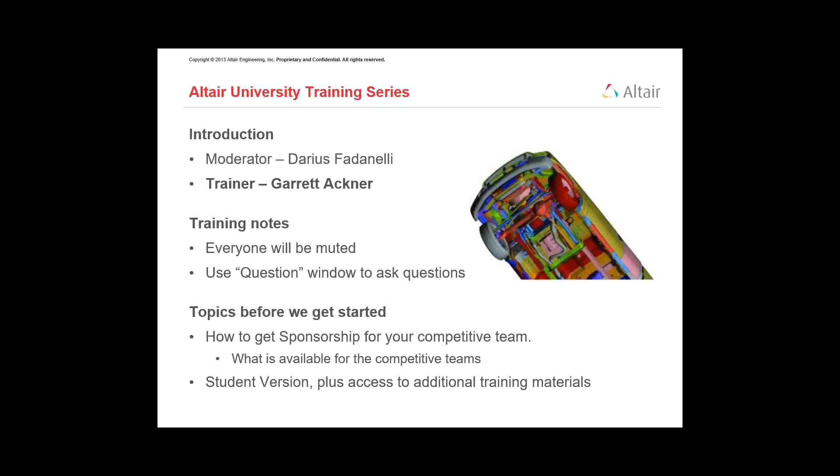Yep, that is correct. So thank you everyone for finding some time this afternoon to be here. As Darius mentioned, my name is Garrett Ackner. I wear a few hats within Altair here. As Darius said, I currently work with our training schedule and our training team.

So really why that matters for you guys is I've probably taught this course dozens of times. I've lost count, frankly, at this point, with both students such as yourselves, folks that have been doing this longer than I have been alive, and kind of everywhere else in between. So certainly happy to pull through a few different past classes and experiences that I've had to help you guys out learning the tool throughout the next couple days together.

Now, one of the things I like to do while I'm going through this, let's see if I can pull this over correctly. I'm going to be a big fan of little note sheets while we're going through this. So to help balance the different materials we'll have, we're going to use a combination of lecture slides, demo models, as well as a few of these hand-typed notes.

I'm going to do my best to both save and share these with you guys at the end of the week. So anything we talk about or write down on one of these little text files together, this is a sample note sheet. I'll make sure I'm sharing and making these available to you guys.

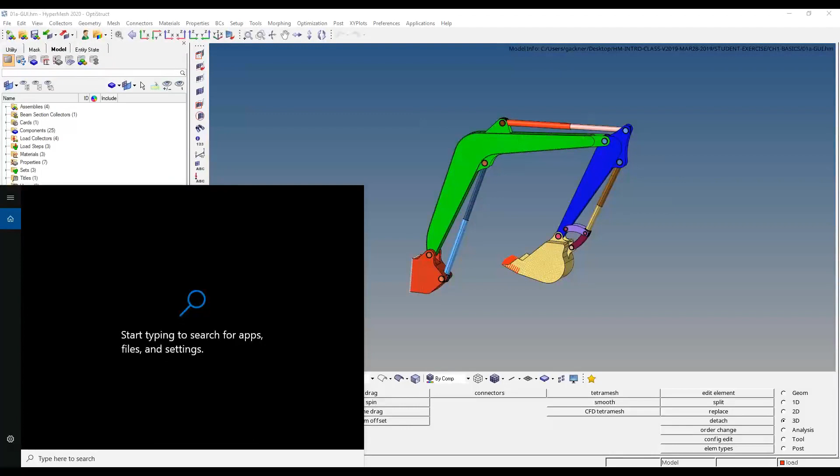Once you're able to get everything installed, and hopefully people have the packages installed on your machine, for those of us using Windows, you can always search on the bottom left Windows toolbar for HyperMesh software. For me, typing HyperMesh in pulls up my own list of all the different builds I've acquired over the last few months for different customer purposes. I wanted to let you guys know I'm using the latest HyperMesh 2020 software. It's okay if you have access to 19 or 2020 - there haven't been too many breaking developments between the releases for this particular product, but just for disclosure, I wanted to let people know which product I'm using.

Now, once you get HyperMesh launched, how do we actually bring in my crane model? What the heck did I just do with it there? HyperMesh, I'll be the first to admit, is a busy interface.

There's a couple things going on here. My goal for today is for us to be familiar with the interface and know how to navigate around the product and within the models we're working with. In a little bit, once we get the ball rolling, we're going to take a look at some basic geometry editing tools, working with solids, working with different surfaces to split those up. And we're going to end today with some basics of surface meshing.

Now, it's okay if all those are new terminology. We're going to start slow here. Moving into tomorrow, we're going to spend quite a bit of time using the product's namesake with a lot of the meshing tools available to us and really go from there. So just to reiterate one last time here.

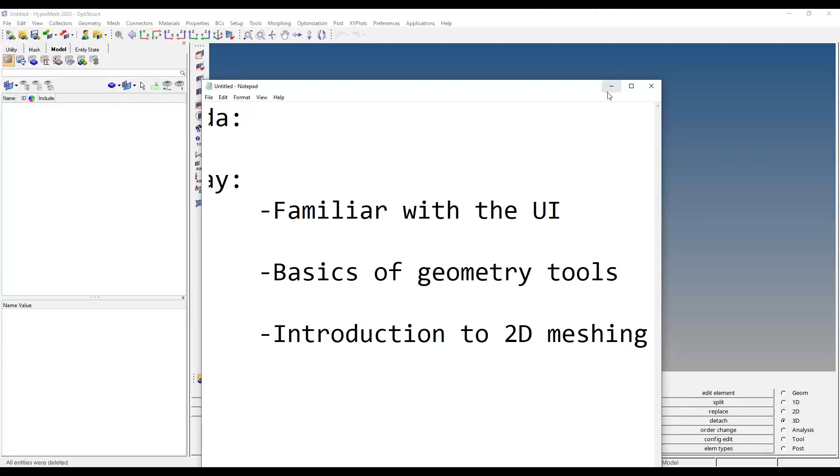Agenda for today, Monday - I want to make sure we weave in the following skills: we should be familiar with the user interface, basics of managing our geometry, whether it's simplifying things, making some basic edits, making some basic splits or cuts, and intro to 2D meshing. We'll cover what these terms are and why we need to do those things once the time is ready.

Now, the absolute most basic thing of HyperMesh, step one here. So now that we've found in our Windows machine where we can launch those, I like to do the search, and within your different applications there should be a little Altair folder. I have an Altair 2019 folder as well as an Altair 2020 folder for my unique packages. I believe for the student edition, that should be saved the same way. Under one of those lists, you'll find your HyperMesh product.

Once it's open, typically what I would start with is getting familiar with our pull-down menus. There's some expected things here, hopefully things we've seen before. If I go to my File pull-down menu from the main toolbar at the top, I have some basic operations - File New, File Open Model, Save or Save As, and import and export options are all available within this pull-down menu. There are plenty of different ways to save things, bring things in, or kick things out of the software. Likewise, there is a basic Edit and View menu as well. So our first mini lesson is we're going to go to our View pull-down menu. For anyone here who's got HyperMesh launched already, you're welcome to follow along with me.

For those of you that would rather just watch and try later, that's all right with me too.

I'd recommend coming into the view pull down menu at the top left of the software. Make sure the model browser is checked on, and also make sure the utility menu and the entity state browser are turned on. Just a few things we'll want access to while going through things together this week.

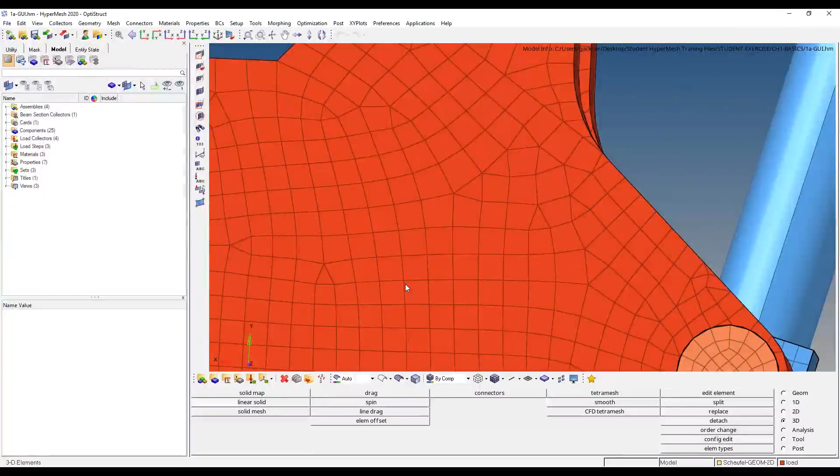We see things that almost have checkered lines on them, broken up into different shapes. I can see the mesh of this red claw body, with all those different individual mesh lines breaking up the different elements or shapes it's grown up with. We'll talk about those in a moment. We also have some smoother cylindrical bodies - we'll talk about what's going on with the actual shafts of that connection rod built in there.

If we come over to the model browser on the left side of the screen, let me bring up a spotlight tool to help with this. Towards the top left, I'm turned to this page called the model browser, which is my list of anything and everything added into my HyperMesh model. For this existing crane model, I can see in the model browser that we have a couple of assemblies defined.

We have something called a beam section collector. Coming down a bit, I have 25 components. I have load collectors, which are organized into load steps. And we even have things like material and property definitions built into this model.

As you'd expect, I can take my mouse and with a left click open up each of these different folders within the model browser. As an example, I can open up my component tree and review individually the 25 components that make up this assembly. We're not going to go through these one by one, but I can see I have something called a cylinder's geometry, a pin 2 geometry, the shovel itself, and they have a couple different things associated with them - that's what I want to talk about first, what's in our component browser.

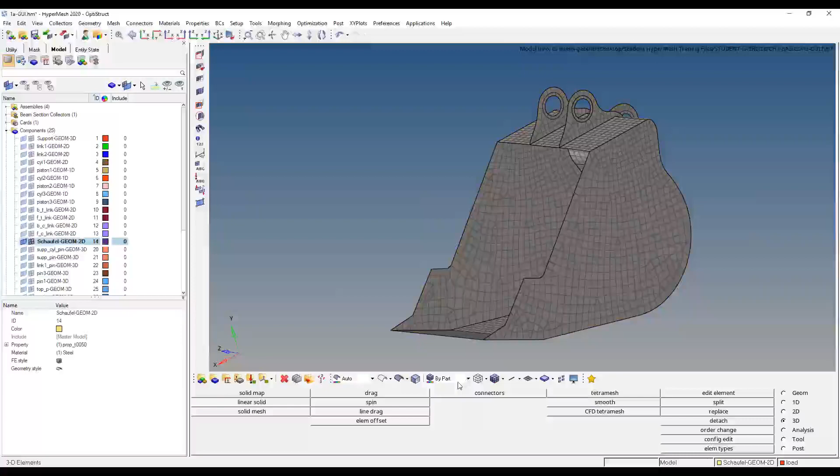I didn't want to update for very specific reasons there. Oh, that's fine, there we go. Now it wants to change colors — I was about to lose it there. We're good now. But just wanted to show that with the components, you control the ID numbers assigned to them, and we can also control the colors for them as well.

Now, what I want to talk about here for a moment, as Darius was starting to get us into, is what's going on with those flags that I mentioned next to each component name.

So they have an ID—sounds great, never going to change it. We have colors; I'm going to make everything my university's color scheme. But what the heck's going on with these two different flag settings?

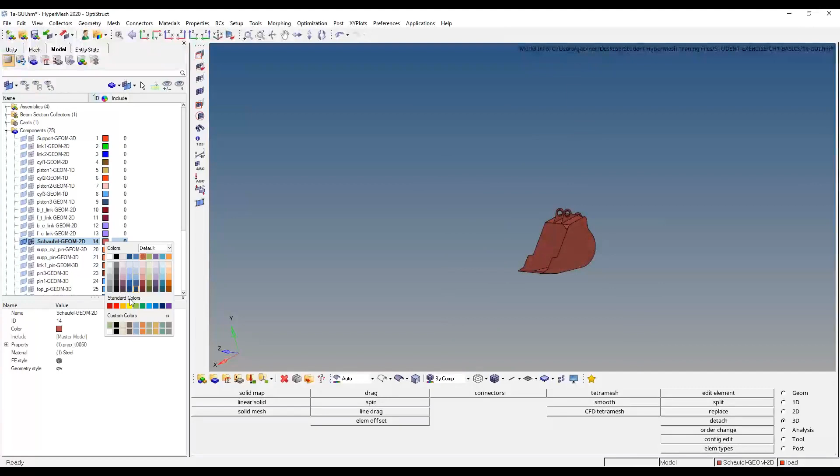Well, this is really getting into the idea of why we need finite element analysis in the first place. So what I'm going to do for a moment here is turn everything off my model and start with just that shovel component again, and I'm going to bring it back to that yellowish color to make it a little easier to see.

Now, typically in finite element analysis, a generic workflow would be to design your part in a CATIA or SolidWorks or some more traditional CAD package—something with a lot of drawing and surface tools to get us not just sketches, but the full 3D model that we can spin. That's what we're going to typically refer to in the FE world, and for the sake of my class, we're going to refer to what's coming out of SolidWorks or a similar package as just the geometry—the geometry file we're working with, whether it's a CAT part file, a solid part file, or whatever else you can get out of these tools.

And if I zoom out for a moment, what I have on the screen is just the CAD file that's been imported into HyperMesh. Now, what we're responsible for on the simulation side of things, and where finite element analysis is going to be introduced, is we are going to discretize these geometries into a different type of geometry that we're going to refer to as a mesh—not only something a computer can read and solve math problems on that's been defined in the software, but that's really where we're getting at with this. This is the idea that we're going to take this geometry file and discretize it. We'll talk about why in a moment.

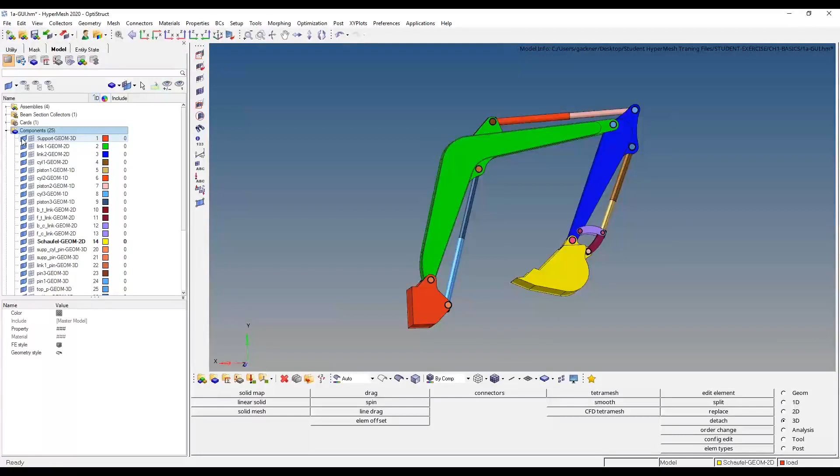So coming back to our flags, we do have a single flag that represents the geometry, or the original CAD, for that part. Right now I only have those left flags turned on in the model browser—I apologize for them being a little small, but the video sharing and I don't get along; you can try to change the application size. Then the other half is that mesh that we're going to generate. So you can almost think of the left flag, the geometry flag, as the starting input that my designer gave me, and now what I'm going to be building are the checkered flags, or the meshes themselves.

And now if I zoom into these, we're not just seeing a perfectly smooth surface across my digger claw—I'm starting to see these various squares and triangles that were created on the surface. This is actually what we're using to represent a part now. It's going to be these squares and triangles, or tomorrow we'll see we can use cubes and wedges and pyramids as well to represent parts, and that's what we refer to as a mesh. So those individual shapes, those tiny bits of the surface or tiny bits of the part, those are the mesh that we generate.

That's why the company charges the big bucks to have access to the software, because that's the real star of the show. And that's kind of what I want to talk into here for a few minutes by putting the software away for a moment. Now, there's a few questions I'm going to come and get to in a moment here.

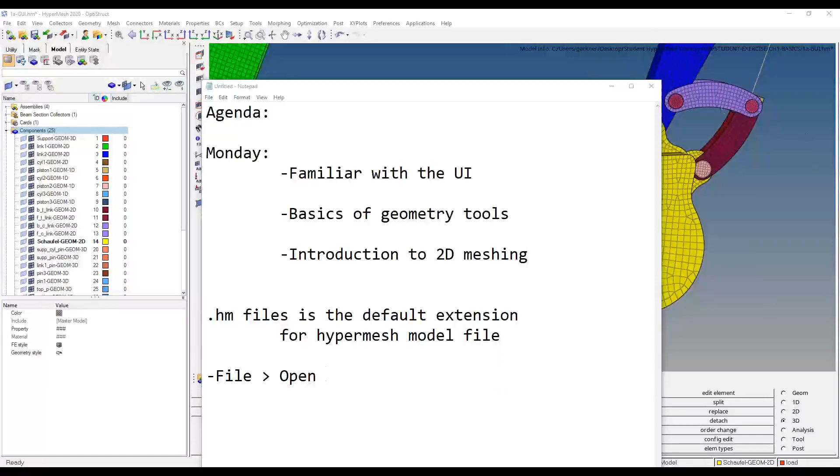I see those coming in. I want to do a quick little background on the theory lesson here, make sure we all got our feet on the ground and we're on the same page moving forward, and then I'm going to come back and address those with Darius here in a moment. Yeah, Garrett, all the main questions have been taken care of, except someone's having trouble from maybe one of the files. But perfect, thank you, Darius.

So what I want to talk to us about today here is what's going on with finite element analysis—what actually is finite element analysis, and why do we need HyperMesh for it, and what's the benefit of this?

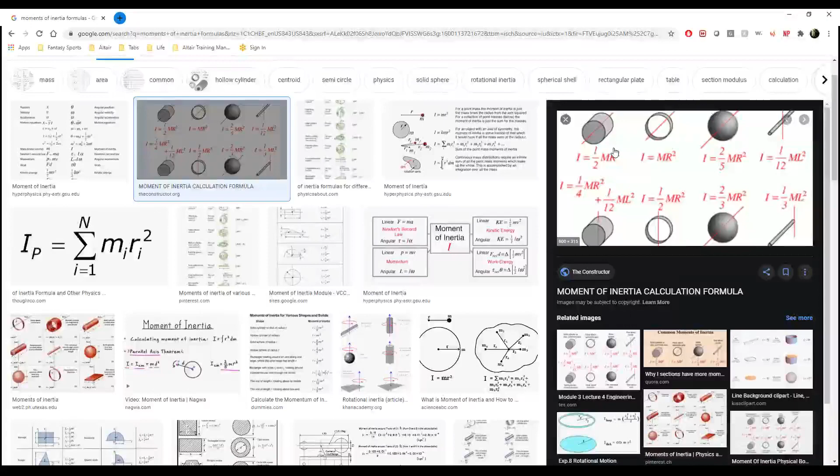So what do we do about our control arm here? We're going to play a quick game of Pictionary together. This is where you guys get to laugh at my drawing skills. So just consider any arbitrary block—this ain't a control arm, this is something else. And my mouse got away from me, so now I got to restart here.

This is going on an auto part, but we have no idea how to describe this in math terms. For now, let's go back to moment of inertia—that's the only thing we need to describe about this geometry in math terms.

Rather than integrating it into infinitely small slices—that's what we do when we're integrating, we're treating things at an infinitely small level—we're going to do it at a finitely small level. Hence the name finite element analysis.

So I think we might agree the math could be hard to solve on something like this—the von Mises stresses that could form from a 150 Newton load being applied directly on top of it. I think we could all agree that if this was a perfect square or a cube, that's a relatively trivial problem to solve. So how do we do that?

Well, rather than breaking this into infinitely thin slices, what we're going to do as users is come in here and break this thing up into squares and triangles—not infinitely small, they'll be kind of small, but not that small.

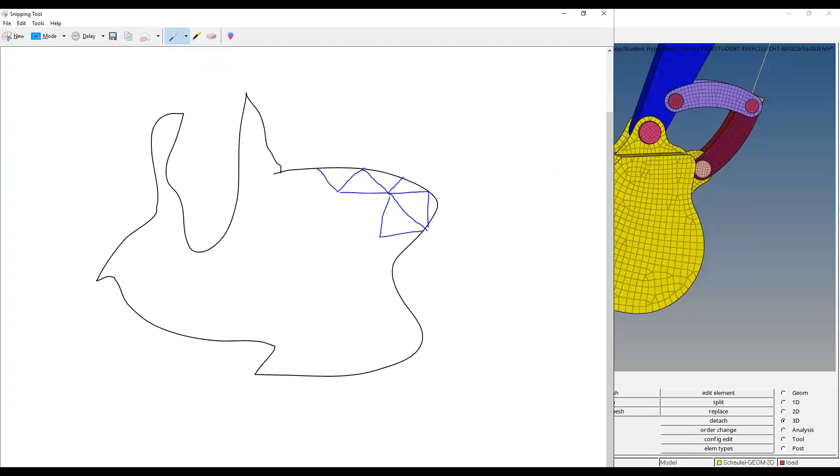So what's happening is the idea behind FEA is to go from one complex geometry, which yields one complex equation in my mind—that's kind of how I think of that. Your CAD file on its own is a complex part, which is going to have all sorts of really complex equations to describe it mathematically. We don't want to deal with that because we want to solve our problems cheaply.

So instead of one complex geometry, one complex equation, we're going to discretize it, or split it up, into many simple geometries with tens of thousands, even hundreds of thousands of elements, depending on the size of the model and what we want to do with it. As a rule of thumb, the more of these elements we use in our meshes, the longer the problem is going to have to solve. We'll see why that's the case in a moment.

But the reason we want to go to these simple shapes is because we know how to quickly solve math. We have convenient formulas for a perfect square, an equilateral triangle, and all these different things. It turns out computers are a great application for solving thousands of simple linear equations in parallel versus one extremely complex equation. It can do the linear equations much faster, even though there's thousands more. So finite element analysis is a really good application for what the computer has turned into.

It's an industry-proven and historically accurate way to do many different problems, including statics and dynamics and all sorts of structural and automotive parts. But I want to talk real quick here on why we ultimately need to go to simple equations and what those equations are. Hopefully this is starting to make a little sense here.

So again, we want to go to simple equations because computers can solve those more quickly, even if there's thousands of them, than the complex equation. But what's the equation we need to solve? What's FEA actually doing? There's going to be different answers to this, whether you're doing a normal modes analysis for the dynamic behavior of a part, or if you want to just do a pure linear static to see how a force will cause a part to deflect.

Those might be slightly different things, but in general, what's going on in finite element analysis is something we've all seen before. It's essentially Hooke's law for an ideal spring, extrapolated into a couple different dimensions. So it won't be just a simple 1D spring - certainly you'll have to account for it in 3 dimensions, but that's the same idea here. We're going to do a quick mini lesson on Hooke's law to tie all this together. For those who don't know, Hooke's law defines the idea that any force you apply to compress a spring, the deflection or the amount that spring's going to compress is going to be directly proportional to the force applied to compress the spring, assuming a linear stiffness K.

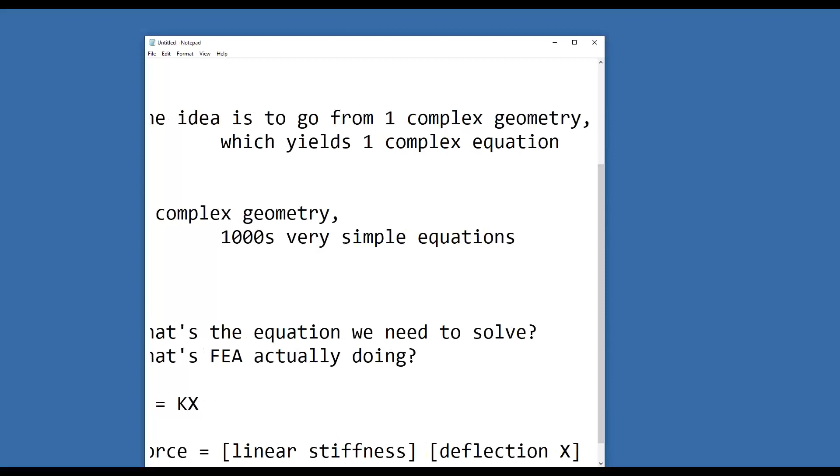So we got some force terms, a linear stiffness, and deflection itself there. Very straightforward. Now it turns out FEA is just solving this equation, but sort of backwards. It actually has to invert it. And that's why I want us to think of this here for the rest of the week.

FEA, a user defines this force matrix or vector, because it's doing this not just for one element, but all of those squares and triangles we saw on my crane model. It's actually solving Hooke's law for every single one of those and then moving on to the next one. So what are the parameters of Hooke's law? Well, we have the force, and that's actually a user-defined parameter.

You as users, and we're going to do this together a little bit more tomorrow than today, we're going to be defining pressures, loads, constraints. All of those different things are things we're responsible for defining. Likewise, you actually defined the stiffness matrix without realizing it. You don't necessarily go into every component and say this shovel on this giant piece of machining equipment is exactly this many Newton meters stiff. There's ways you can go about that, but stiffness is actually derived from a material definition and a property definition. Those are things we're going to go into more detail with tomorrow.

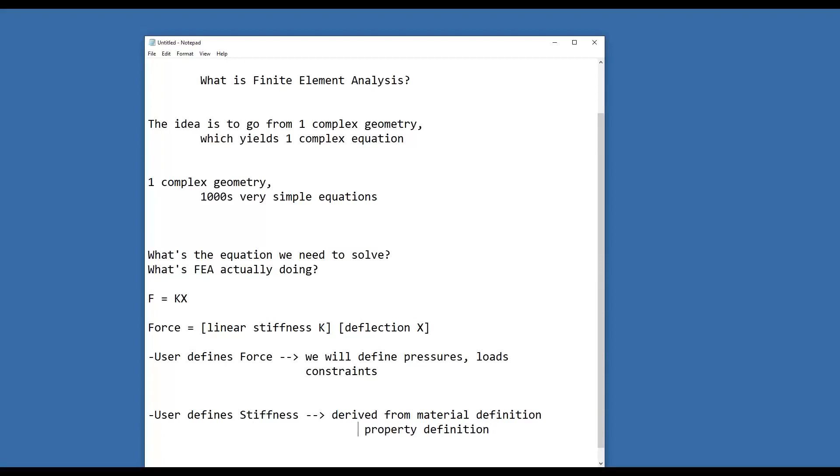And then lastly, so we have two terms. We have one equation, one unknown. It really just inverts Hooke's law to be F over K equals X. This is a deflection of the spring or element. This gets turned into a displacement and a stress result. So that's all that's going on.

What we're doing in FEA is we're taking apart a drawing file, a CAD part that we drew up in SolidWorks. We worked really hard on it, did all the extrusions and Boolean maneuvers. Looks really clean. It turns out that's a really hard problem to solve on its own. CAD files have crazy different geometry file formats—there's all sorts of ways you can define the same 10 surfaces. So rather than go into the world of really complex surface equations to solve Hooke's law in, FEA admits that could be a mathematically challenging exercise with a lot of inconsistent results.

So we're going to just break things up into many small shapes. Turns out small shapes have easy math to work with, and we're going to solve complex math problems as a series of very simple equations. Through that workflow, we can determine yield stresses on all sorts of auto components, do dynamic analyses, work with moving parts. There's a world of physics problems we can simulate in finite element analysis.

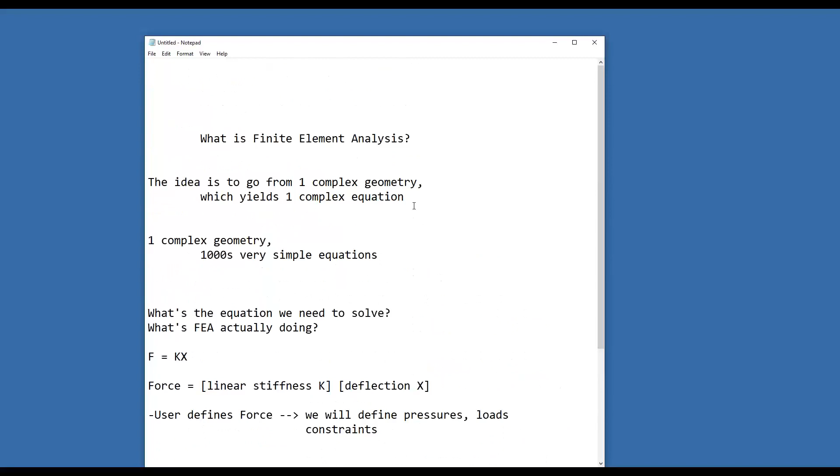I just want to make sure we understood, before we get too far into meshing today, why we need to do this. And the biggest reason is that it's a mathematically expensive problem to solve. But if you just break it into simple equations, simple shapes, it gets a lot easier. And if anyone ever asks you what's going on in FEA...

You are not wrong if you just tell them it's Hooke's law. Someone might laugh at you and say that's not a complete answer—I would tell them to go shove it. You're welcome to do what you want to do, but really, it doesn't need to be any more complicated than that. And that's where we're at with this.

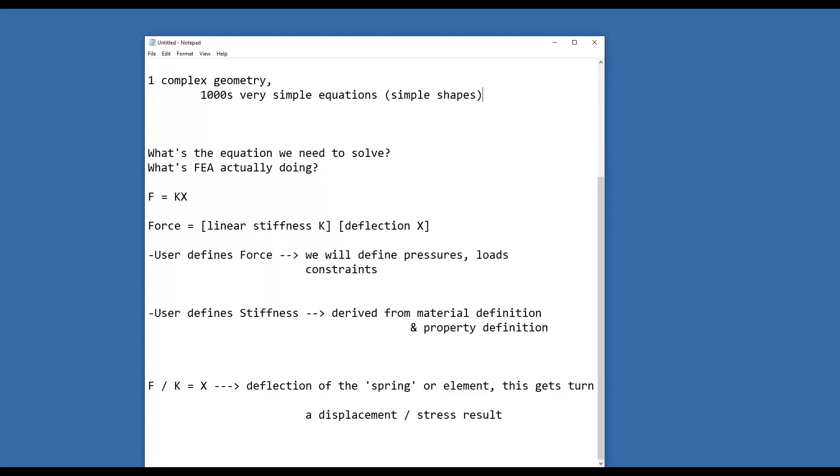So hopefully that gives us some traction here for those of us that maybe have had some other experience with this that helps fit your own narrative, how you thought of it. We're kind of going to continue, but I'm happy to pick up with people as we need to throughout the week here.

Now, with that said, I want to talk a little bit about some steps we'd want to take with our geometry files as well. And actually, before I get there, I want to make sure we wrap up with our model browser. I don't want to go too far here.

So what I'm going to do here is come back to my little crane model, and go back to that component browser in my model browser. So I have my component tree open, and again we're seeing all of those different components again. So what's going on here is we have those two flags we were learning about.

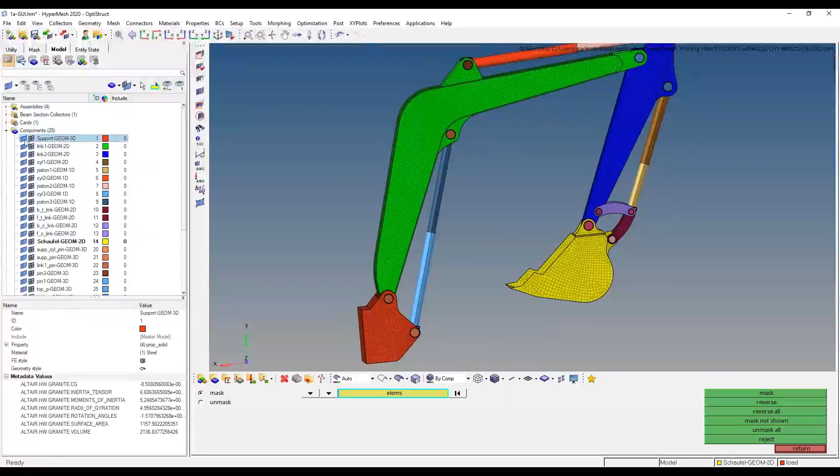And we're going to remember that the flag all the way on the left—I turn everything off—will allow me to review the geometry of each part. That's the CAD entity of it, and the input that our CAD designer sent us. And we're going to remember that the other flag, half of each component, is going to be the elements or the mesh that's associated with that part.

So it's nice that HyperMesh keeps those entities separate. We'll see why that's specifically the case, but I like to think of it as a good way to keep track of what you started with and what you're going to turn into the computer to solve your problem and get these optimized or simulation results completed. And some nice quality of life things we can do for driving a HyperMesh session.

As you've hopefully seen, as I left click with my mouse on one of those flags, you can turn that entity off. For example, I could come into any one of these components and start left clicking to turn off all of those flags, and it will hide the geometry half of the component. Notice the mesh is still being left behind - that has a separate flag to turn off.

Just like I'm turning off all of my surfaces or my CAD data, I can turn off with that same left click the meshes for these components by left clicking that mesh flag as well to toggle that off. So quick ways to turn on your CAD, turn off your elements, vice versa, whatever's easiest for you to see at the moment.

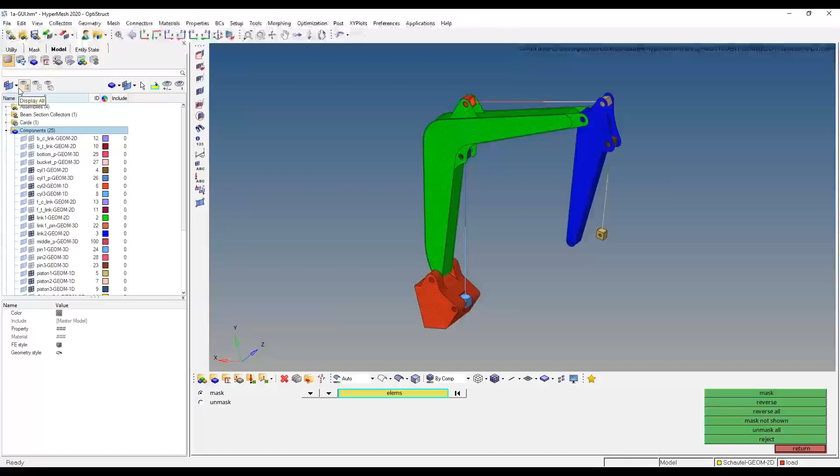The first thing on the left of this little toolbar, just above the model browser, is a drop-down flag control. For now, I'm going to leave this to be on both the mesh flag and the geometry flag. Just note we have controls here to display everything, to turn all of those flags on, a control to turn all of them off, and you can even flip the display state as well. So right from this little browser, you have quick controls on what to turn on and off, like we saw earlier - individually or in a more global way.

One other thing - I got to come a little more to the right to highlight it again. So I come up here, all the way to my right side, there's another one of those scary looking eyeballs. One of them's got a plus minus, one of them has a 1. These are two tools that are toggled controls. I'm going to left click it to turn it on - you'll see it's highlighted orange now.

The one with just a number 1 allows me to isolate a component - click to isolate it, nice and easy. Or likewise, the plus minus tool works in a cool way where I can right click a component to hide it, or I can left click over where that component was in the display, kind of like referencing a ghost almost. You can left click to turn it back on.

So short answer, a lot of your display controls on what you're seeing in the software is all managed from the model browser, specifically within this component tree. You can turn things off individually, or from the very top of that browser, there's a couple other controls to manipulate what's coming in and out of the display state.

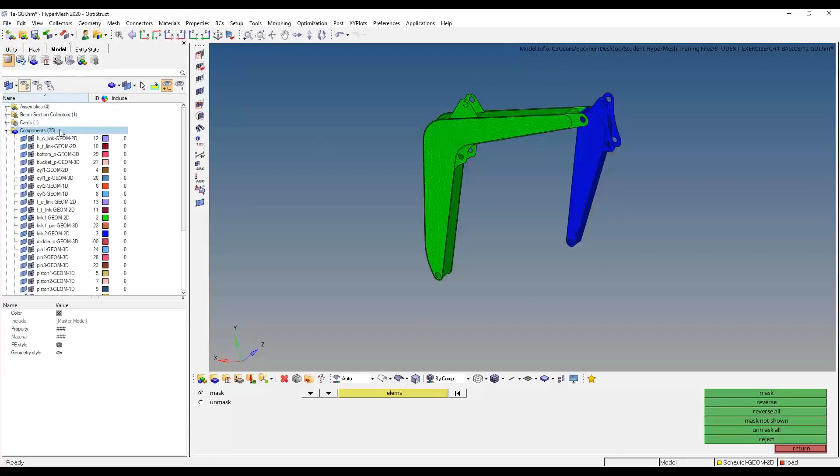I'm going to come back to this little assembly here and turn everything back on. And what I'm going to do next is go to File, Import, Model. I'm actually going to import in the next model we're going to see together. So I'm going to go to Import - it's already set to Model for me at the top left. Let me talk about what happened here.

It just opened up a little import tab for me. These 5 green arrows refer to some of the different entities we can import. I know that this first one is already set to import model, and if I hover my mouse over it, the tooltip will come up to let me know that that's import model. Now what I'm going to do is click the little manila folder just under it to select the file I want to import.

I'm actually going to go to our Chapter 2 student exercise folder and bring in a model called Quad Mid-Surface, and I'm going to import this in. Now you'll notice it didn't get rid of my crane assembly - it just dropped this new little surface model, this blue thing, right in the middle of space, and kind of had no regard for it. It just sort of showed up, didn't knock on the door, didn't take off its shoes, didn't do nothing, but caused me some problems here.

And that's okay - I don't want us to think that import is always bad.

One of the key features I hope we're taking away from this is that import is always, without any regard for you, appending to the model. It'll only add things without clearing.

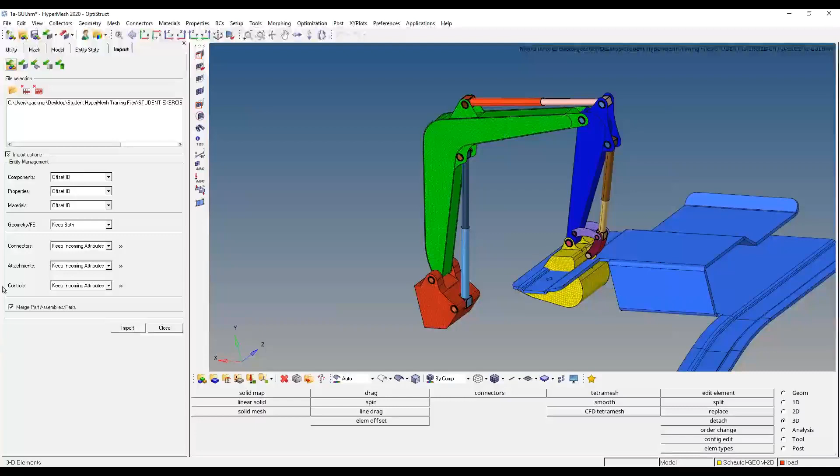Whereas if I come here now and do that same thing with File Open, I'll get that same model, Chapter 2C, Clip Mid-Surface. I'm going to open this. A little message is going to prompt me to discard the model. So I'll say yes, and now it launched a new session for me with only that new model in it. So rule of thumb: File Open clears everything before it brings it in. Import doesn't do any erasing.

Now, there's a lot of geometry tools available to us in HyperMesh, and there's a lot of reasons we could be interested in modifying or reviewing, or in some cases repairing geometry. From my experience, there is the biggest variety of different things you can do in HyperMesh at the geometry level, and it also has the potential to be the messiest. But I don't want to scare people, because while both of those can be true, 99% of the time you don't have to worry about your geometry. What I want to do instead is talk about what are some of the things I want to be aware of, what are some good habits for me to build while reviewing my model, what could that checklist look like. That's what I want us to think about while going through this.

So before we go too far, if we were to go into our student PDF folder here, I'm going to pull up Chapter 2 Geometry for a second. Now, this is a 111 page long slideshow for just Chapter 2. Likewise, the other sections are pretty large as well. And like I said before, we're not going to have all the time in the world to go through every single one of those slides. But I would certainly recommend to those of you with the time and those of you that are motivated to do so, give these PDF files a thumb through.

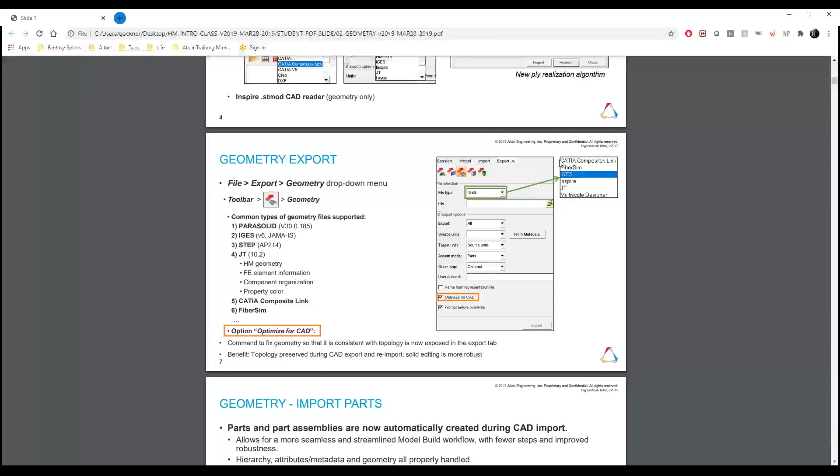If I find out you were reading one of these and it took you 8 hours to get through it, I'm going to find you and yell at you a little bit for reading it in too much detail. But what I would tell you guys is, take a half hour one day, while you're eating your Cheerios in the morning, or right before bed when you want to get a little bit of work done. Take a half hour and just thumb through these slides. There's a lot of good notes here, for example at the beginning on the different files we support and the commercial product for different geometries to bring in. It talks about the different geometry file types we support upon export. So just like there's an import, there is an export.

What I specifically wanted to show with the geometry slides is there's a lot of stuff in this slideshow. If I get down to slide 24 here on creating geometry in HyperMesh, we're going to see there's a lot of tools similar to CAD packages in HyperMesh to create new surfaces, new solids, just single lines. But in no way, shape, or form would I recommend that HyperMesh is your new start to part design and geometry design. We're going to see, hopefully by the end of the week, that FEA can do a lot of great things for our design processes. Specifically, creating geometry is probably not that one tool set.

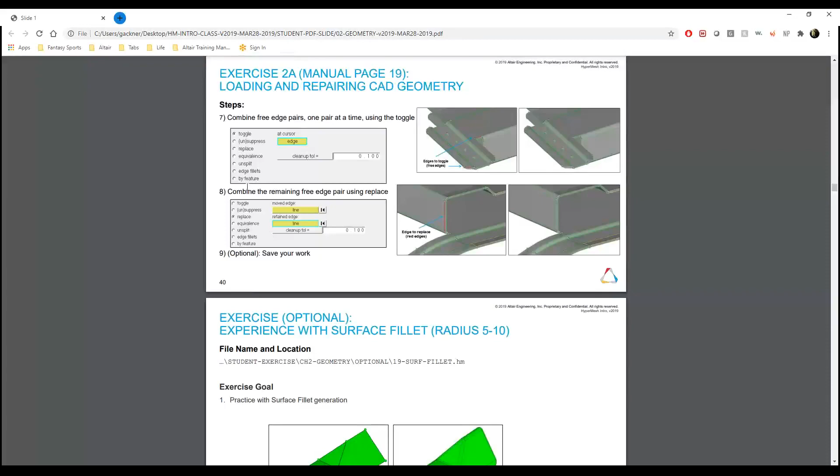So why I bring this up is if you're going through these slides and thinking to yourself, man, there's a lot of slides on creating surfaces and creating solids, don't worry too much on that. I would just kind of skip right through it. Or if you need some substitutes to your CAD package, definitely check out those features there. But I don't want to get too caught up in those. Instead, what I want to do is talk about some of the things that are probably worthwhile learning about as you're going through this.

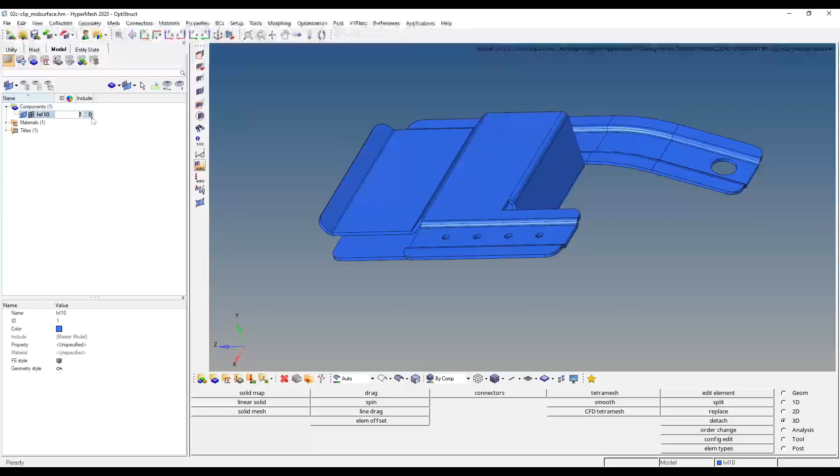Now, in FE or FEA, we've already learned that we're going to traditionally start with a CAD package or a CAD drawing file. In this case, I had a little simple clip model to work with. And this is a 3D part. I know that might seem obvious, but we're going to see today and certainly tomorrow that FEA is flexible in the dimensions of the components it works with.

It can work with both sheet metals or infinitely thin surfaces at a 2D level, as well as the 3D level here. But what we're going to learn now is that oftentimes it's a shortcut to treat 3D objects as a 2D object. And where we can really get away with making that sort of assumption, we'll see how it's not truly an assumption in a moment.

This is often done for sheet metal parts, a lot of plastic components, or really anything where it is much longer and wider than it is thick. So in this case, where X is roughly on the same scale as Y, but both of those are substantially larger than Z. And like we said, this is commonly in sheet metal, many plastics, especially injection molded plastic parts, we'll kind of treat as a 2D entity in FEA, even though it's a 3D object.

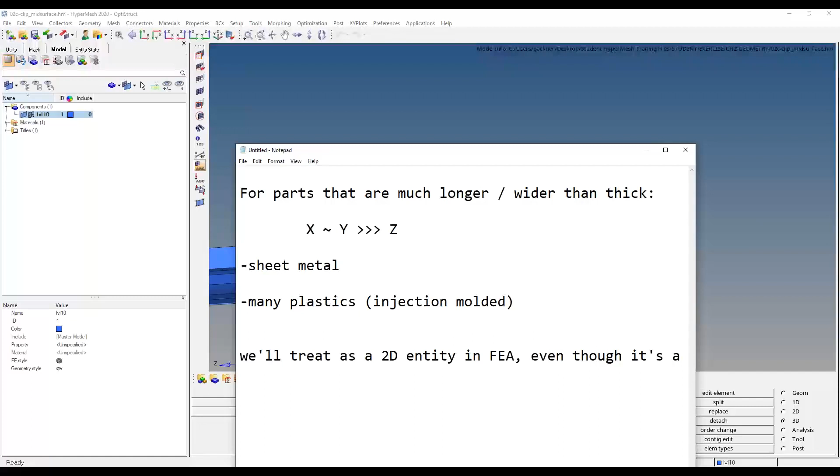So why the heck would we do that? What's the purpose of doing that? Well, I want to go back to our little short lesson in FEA for a moment. And then I promise I'm done doing the lecture. I probably should have forewarned you guys, the first hour with me is the hard part, and then I'm done talking at you. We're going to get really good at using the software here. But we're right there.

Knowing we got to do all this Hooke's Law stuff we talked about earlier, and we're doing it at each and every single shape or element that we created on the mesh, this is going to be dependent on the mesh here, knowing that we have Hooke's Law. So what are the implications of what we talked about on the previous slide? A couple obvious things here that I want to point out to us.

More elements means longer computation time because it has more equations. Smaller average elements typically means more elements. And likewise, for each element, Hooke's law is technically calculated. I don't know if I want to be that strict on it. I don't want to. At each node, though, and that's the final little entity we got to learn about here.

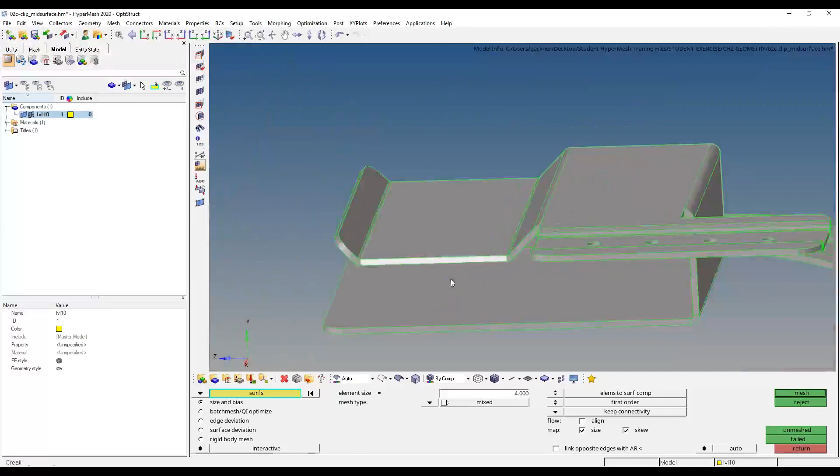So I'm going to come back to my little clip here, and I'm just going to throw a mesh on here. And again, I'll make this yellow to make it a little brighter for us to see. I'm going to come into my automesh tool. We're going to see how to do this together in our afternoon session in a moment. And I'm just going to put a little couple layers of square elements on this guy.

So I've gone ahead and started meshing this part. I've only applied elements to just one of the surfaces, and I'm going to zoom on that here. So each of these square elements, I know they're a little bit more rectangular, has four corners of it though, hence the definition of a square. But at those corners of an element, we refer to them as a node, and it's its own standalone entity. And those nodes have some relevance within the calculations as well here.

But where I was going with this, and why we need to be aware of the nodes, is we're going to play our last game of Pictionary together. And at that point, I promise you, cross my heart, all that good stuff, I will not bother you about theory again. But the last thing I have to talk to us about is when we can get away with modeling something as 3D as 2D.

So we're already kind of starting to think to ourselves that sheet metals and plastics and generally things that are thin, and the terminology you'll hear often are thin solids, is that we're going to model them not as 3D but 2D. And why we might want to do that is just to reduce solution time. This might seem trivially obvious, but it's still a very good shortcut and a very good thing to remember.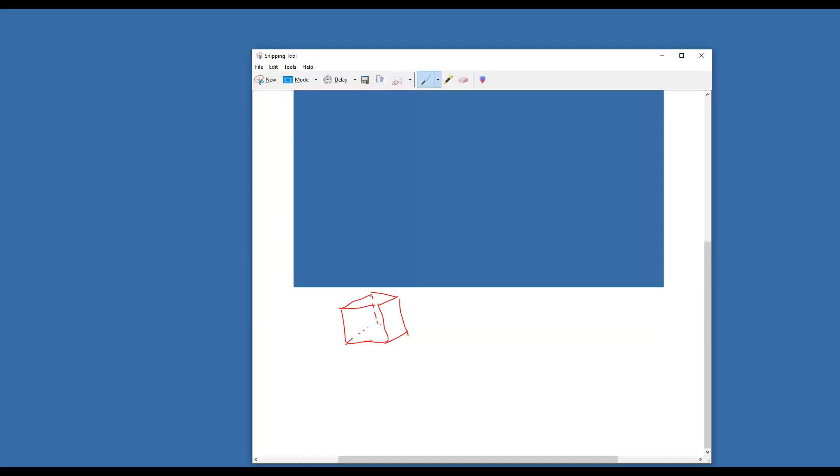So if we wanted to model anything in 3D, we would need a 3D element. We would need cubes or pyramids or something that exists in 3 dimensions to solve math on. And we know that your typical 6-sided cube is an 8-cornered entity. And so this is an 8-noded cube. And its 2D counterpart, just the flat, infinitely thin square, is a 4-noded little guy there.

So right away, if we can get away with modeling something as 3D as a 2D body, we're going to reduce the node count necessary to model that using our elements. Essentially, we have to do Hooke's law for only half the number of equations. We don't have that many nodes or sampling points, or data points however you want to think of it, that we need to calculate results for.

We went from 8 equations to solve to 4 equations to solve for every element. And these models could be as big as 25,000 elements to 2.5 million elements. So you can really see those time savings there.

One other thing I can say is that as your solution time gets more complicated... for a lot of linear static models that only take up to an hour to solve, 5 minutes or 20% or some of those time savings don't seem that big on something that's only an hour. But some of these more complex models you can build in finite element analysis, like a crash analysis as an example, those could take as many as 2 weeks to solve for on a computer running day and night. So if you're talking about saving 50% runtime, that doesn't always have to be an hour to a half hour.

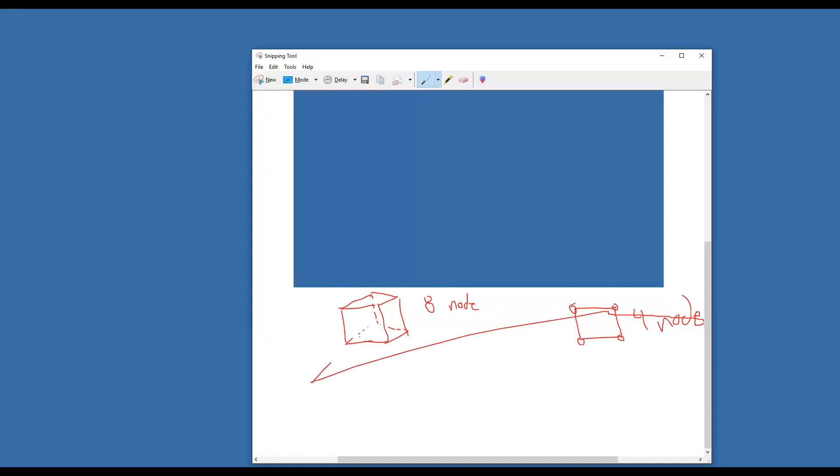That could sometimes be 10 days to 5 days, and you could really see some time savings. So engineers are always looking for excuses to reduce those times. This is the easiest example of that shortcut.

Now, how do we actually get away with modeling something as 2D? It exists in 3 dimensions. We can't just lose the thickness dimension of the part. I can't just say something was once a quarter of an inch thick, but screw it, it's now infinitely thin, and we just lost that quarter inch of mass. That's certainly not the case.

It's a smart approximation, and what's going to lead us into this is the idea of a mid-surface. So the first geometry tool we're going to learn about today is a very simple one called our mid-surfacing tool.

What this is going to allow me to do, I'll demonstrate this in action here. Don't worry about following each individual step for a moment. The mid-surfacing tool allows me to take a 3-dimensional solid that has a relatively uniform thickness. Hopefully it should have a uniform thickness. What I'm going to do is hit extract to pull out the middle surface, or the infinitely thin plane that would lie at its halfway point.

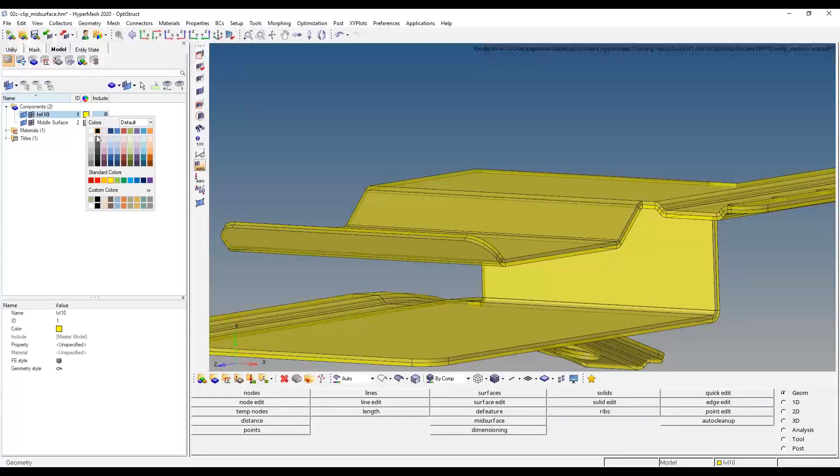So I'm going to set the 3D object to be gray for a moment, and the mid-surface to be this bluish color, or maybe I'll go back to yellow there. I have some transparency set as well - we'll talk about visualization controls in a moment. But if I set this in a side plane for a moment and zoom in...

Garrett, maybe I missed this, sorry if I did - could you explain how you're zooming with your mouse and panning and so forth? Totally, not a problem there.

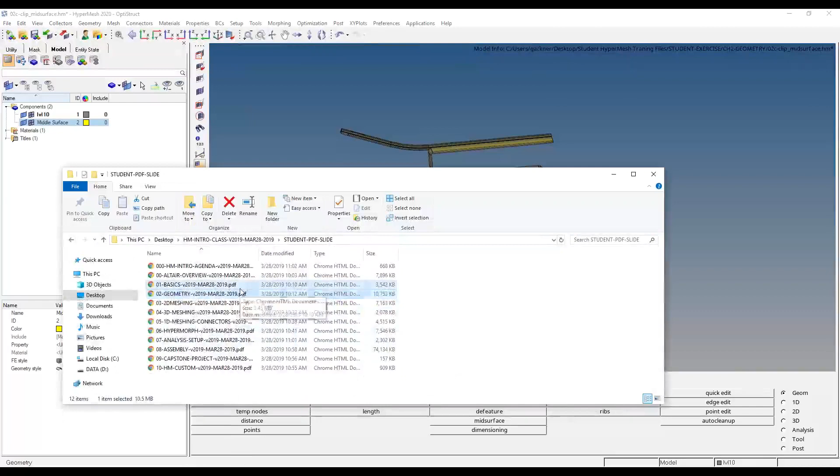Yeah, so we're going to take a step back here and actually navigate the interface itself. We talked a little bit about this component browser, my model browser, and how we got this big list of things. But at a very basic level, if I zoom back out here, I'm going to steal a little slide from our Chapter 1 slideshow. Some of the slides I'd recommend reviewing start on slide 21 of your Chapter 1 Basic Student PDF. We do have the complete list of mouse controls there.

So the first thing I want to call out with the controls - it's funny, I don't have faces in front of me. With live training it's much easier for me to catch on that people can't spin things around because I'm seeing everyone's face of total confusion. Here, I'm just assuming you guys are like upside down, hands behind your back, spinning your models around, doing all that cool stuff. So certainly slow me down as we get ahead of things.

But the biggest thing I want to call out with our controls is that you do need to hold the control key with the default scheme to spin things around. So let me talk about what I mean by that - I'm going to bring my model back up here.

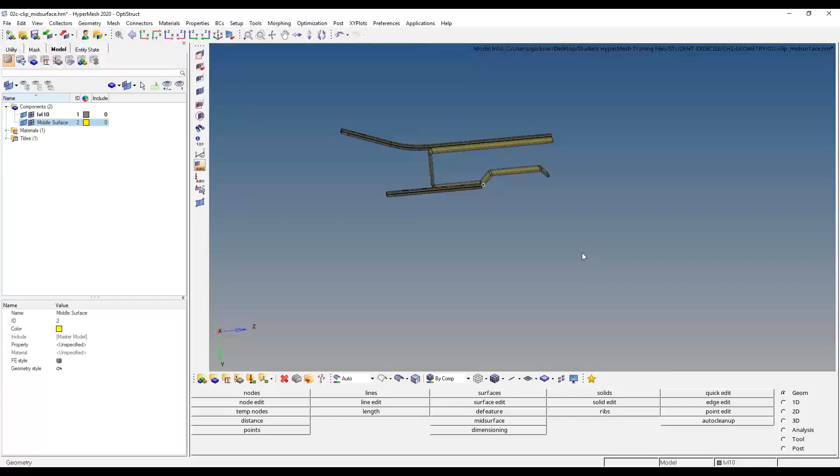Now, in order for me to zoom in and out, I wish you could see me just doing the scroll wheel on its own and nothing's happening. I use my mouse with my right hand, so my left hand stays near the keyboard. With my left hand, I hold down the control key, and now as I use the scroll wheel, we zoom in and out. Very quick and easy to access.

Likewise, while holding that control key down, if I left click and drag, I'm able to both set my center of rotation and spin the model around. So if you want to set and change that center of rotation on the screen, hold control, left click the graphics area, and it will move. It looks like a very small white square that moves your center of rotation so you can change where you're rotating the model.

As an example, I'll set my center of rotation to the very far right of this model, on this far corner over here. Control and left click, it's placed over there. Now we'll see that it will pivot about—I know it updates a little slow—but it will pivot about that corner now. Very flexible to work with.

Coming back to my slide, we've already seen that left click can be used for rotations and setting the center of rotation. The middle button or scroll wheel is used for zoom, and the right mouse button—don't sleep on it—if you're still holding control, will allow you to pan the model in the existing view. It might seem annoying at first that you have to hold control to do these things, but one reason is so you don't accidentally spin the model around after spending 20 minutes setting up a view to look into a channel, and then accidentally rotating it. It also gives you an excuse to keep your hand near the other keyboard shortcuts, which we'll dive into tomorrow.

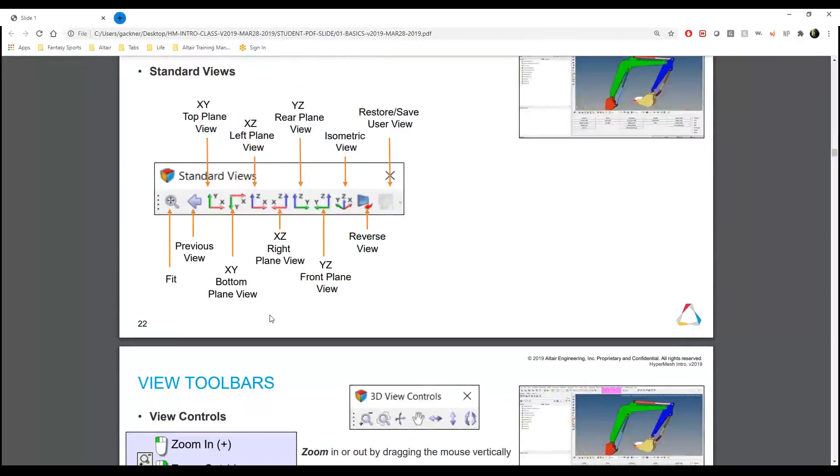Now, while I'm stealing you guys for some of these basics, some other quick things to call out: we have standard view tools available from the top toolbar, looking at slide 22 together. You have your 6 standard views, including front and back of each, but it also comes with an isometric view and a tool to flip the view 180 degrees relative to the viewplane of your computer monitor. So if you want to see the backside of an existing view, you can flip it with that reverse view option.

And speaking of keyboard shortcuts, let's say you really like having this view set here—if you hit F on the keyboard, I'll put this in the chat window for everyone. F for fit all is the keyboard shortcut to fit the model, zooming in or out to an appropriate level so everything is visible in the model screen.

So if you accidentally zoom too much in and get lost, with no idea what this patch of yellow is you're looking at, you can hit F to fit all and zoom back out to that level. Or likewise, if you zoom out too much and lose your model, F to fit all will fix that zoom.

Another one: maybe you set this view up perfectly, hit fit all, and then accidentally rotate when you didn't mean to. If you hit B for back, it'll restore the view to the previous one before you rotated or panned or did whatever operation. It doesn't go super far back—just those two views you can toggle between—but it's a very nice tool. If you accidentally rotate and want to reset, you can always hit B to go back. We'll learn a lot of these along the way in our lessons.

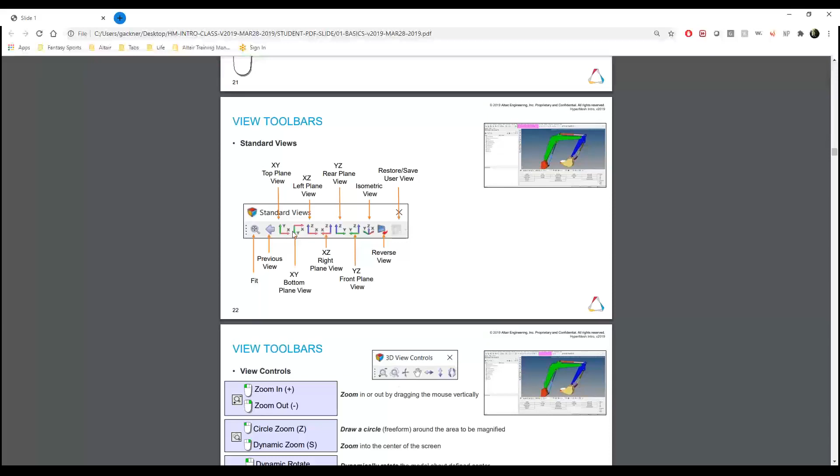And that's where I want to talk about our visualization toolbar for a moment here. So Darius, thank you for stopping us when you had, before we'd gotten too far away from some of this stuff.

Yeah, I know, Garrett, when you get excited and you're showing a lot of things, we jump into different areas. I just wanted to make sure, because actually there was a question that came up about the mouse controls too, but that's because we're going along quickly here. So, but no, thanks for showing it.

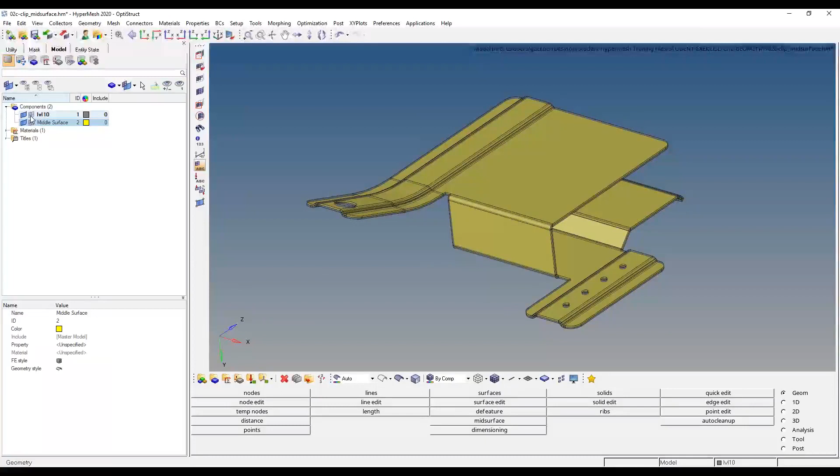Yep. So like we said earlier, we learned that we can use, at a basic level, these different flag controls from my model browser to hide my geometry or the FE. In this case, we have no elements created, so that's not going to have an influence on the model yet. We've seen that for the top toolbar, we have all these different planes we can set the model in. But how do I actually change what these things look like beyond the color of something?

And that's where this visualization toolbar is going to really help us out. The visualization toolbar is on the underside of the graphics area. Bring my little spotlight back up. What we have here is kind of two halves, and I hope we're noticing that theme, where one half is associated with only the geometry or how the CAD's being represented, whereas the other half is the FE half, the finite elements, or just how my elements are being rendered.

So for now, I'm only going to focus on the surface rendering half. What we have here is a drop down that adjusts the coloring mode. It should default to auto. And then we have a couple of tools that control the wireframe display, the surface shading, and even the transparency that's applied to the body here.

One at a time here, I can see there are different ways I can color my component. Those are, for example, by comp, which is short for by component. This just means whatever color is assigned to the component color in the browser, that's the color I want you to make it. But we also have one called by topology. We'll talk a little bit more about that tomorrow. I want to stay out of the topology lessons today.

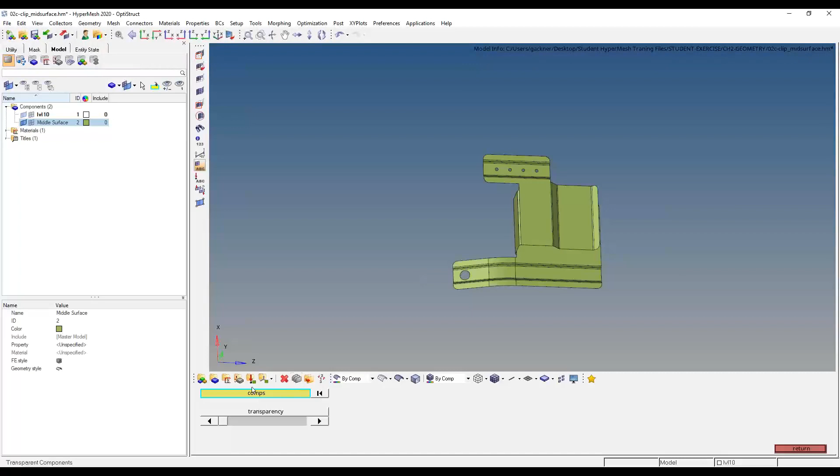So which components do we want to make transparent? I'm going to select a component from the graphics area. I can just left click and it'll highlight it white to let me know it's selected. Now I'm going to use this slider bar on the transparency side to adjust the levels of transparency. I can go all the way to the right to have it fully transparent, fully to the left to have it completely opaque, and along the way give it whichever degree of transparency you're looking for.

Once you're all set, you can hit return. The panel area has been restored. Now, it's typically a little more practical to do that. There are likely transparencies you'd want on your 3D objects as well.

So same thing, I can go back to my transparency tool. I've got that same component, a yellow panel asking for user input. I'm going to select the component and apply the transparency. Now, there are often other controls on these panels, and it's not always just a simple one-step process to apply transparency. Some things I want to point out before we expand on this.

This little arrow on the right side of the panel next to components is clear, or clear all. It's pointing to the left, kind of like a rewind button on old school tape players and CD players. So I can hit that rewind button, and it'll empty the selection of my current panel, deselecting the component at the moment. It's a nice way, if you accidentally selected a bunch of stuff and realize you were wrong, to clear it all instead of deselecting individually.

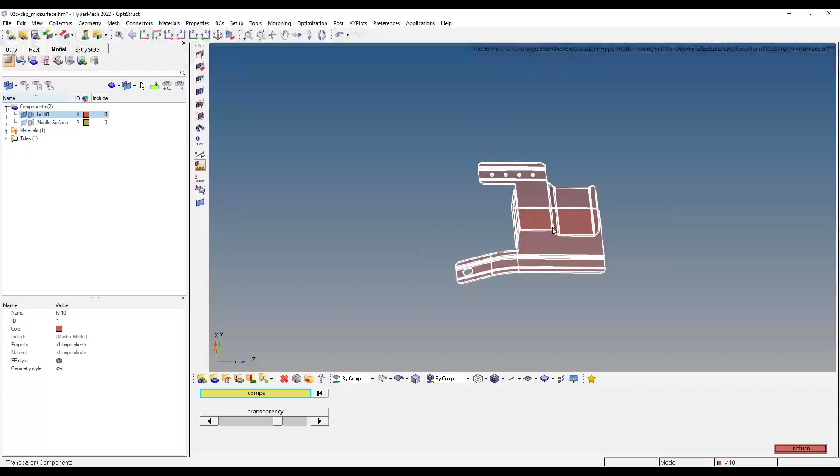Now, likewise, if you only wanted to deselect one thing, just like left click from the graphics area selects something, you can right click to deselect it from the selection. So anytime you're adding something into a panel selection from the graphics area with a left click, you can always right click to deselect it as well.

And I'm going to go to that same transparency tool. And while going through this, you might be thinking, man, that's a lot of clicking to apply transparency to everything, having to click all those different components one at a time. As a rule of thumb, if you have to select a number of things and you've clicked more than a dozen times in HyperMesh, you weren't leveraging a shortcut that could have saved you time.

So in this instance, if I just want to grab everything, a quicker way could have been to do a window selection - click and draw a box around the parts, let go, and it selects everything in the box.

How I had done that was I held Shift on the keyboard, and while holding Shift, I left-clicked and dragged that same left-click to grab a component, and I can simply release them both to release that window selection.

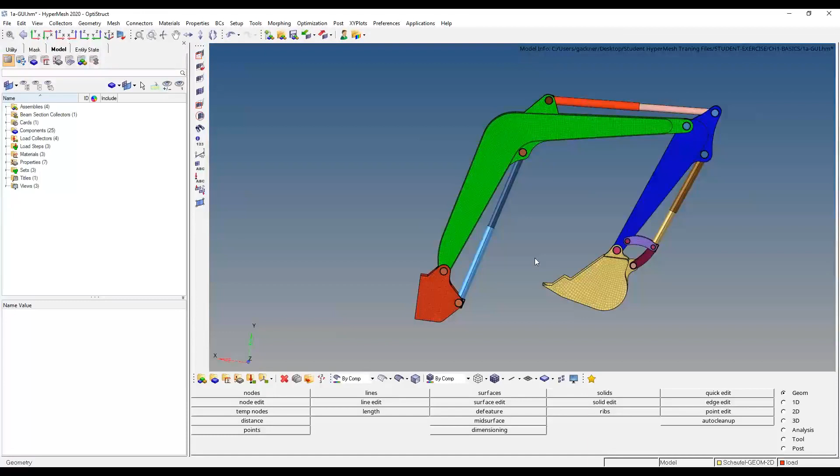That's something I wanted us to be familiar with throughout the week. We're going to see plenty of different panel menus, but the biggest thing I wanted us to be aware of for now is that yellow panels are ones looking for user input. You can get user input from the graphics area, but we can also use the panel itself if we select it to introduce some shortcut methods.

Now, speaking of shortcut methods, where does that put us with that previous clip example we spent a little time on? Where we were at with this was talking about this idea of modeling 3D things with 2D elements. How is that the case?

Well, if I come back to my little game of Pictionary here, the idea behind why we're interested in doing this is essentially that 3D objects are more expensive mathematically. A cube with 8 nodes is going to be roughly twice as expensive as a 4-noded infinitely flat square or sheet. But how do you actually model something as 3D if it's only 2D?

The answer comes from this idea of an analytical thickness that we can apply later. So what happens here is my length, width, and thickness on this cube all equal, let's say, just 10 millimeters. This is a 10 by 10 cube. I'm sure you guys love my handwriting. A 10 by 10 by 10 millimeter cube.

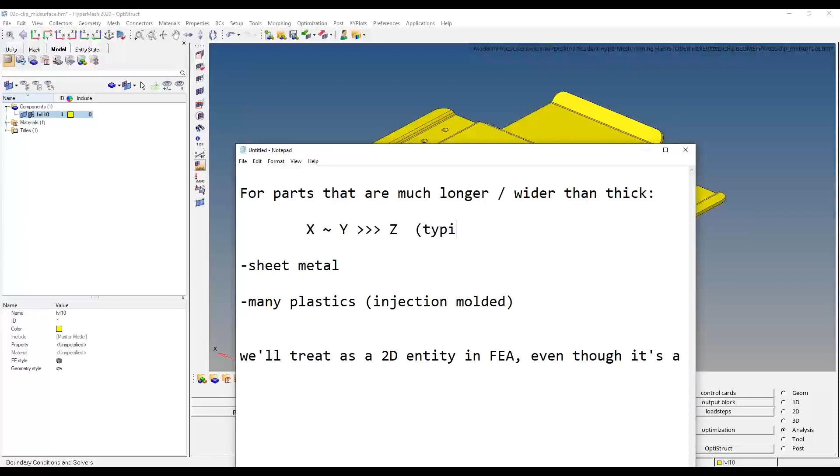Garrett, I just wanted to add a point. I know you're trying to visually help out there, but there are some rules to follow with what size your thickness should be in a model you use. There's the plate theory that specifies your typical thickness to width ratio of a plate structure should be less than 0.1, and that's a rule that should be followed.

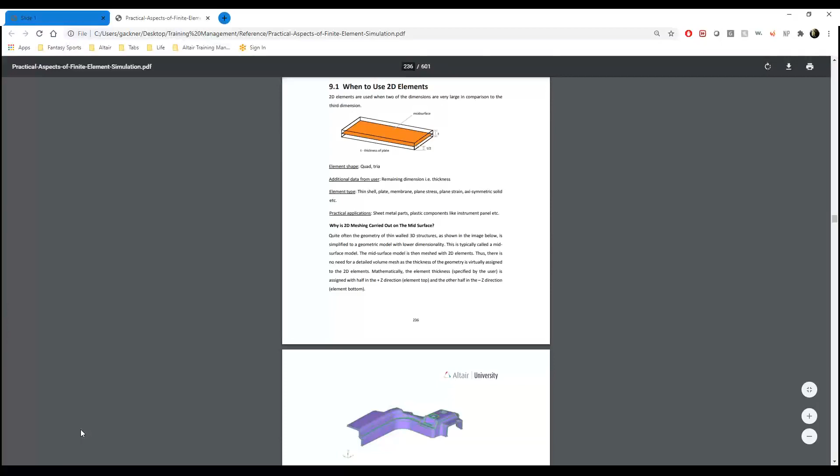We go over a lot of the details in there, descriptions and a bit more theory. If you haven't taken an FEA class, you could go in there and it has this covered pretty well. It's quite extensive, so it's good material to keep in your library on the teams, so you can point people to that. This does get confusing, especially for people who haven't taken an FEA class or done projects, on what should be done. We just want to make sure we don't use plate models when we really should use solid elements.

Yeah, that was perfect, that was perfect timing too. And that document that Darius mentioned, that Practical Aspects of Finite Element Simulation, I was going to wait to mention that on our last session together here. But you can find that on altairuniversity.com under the free ebook section, as Darius had mentioned.

I read quite a bit about this before I joined the company, in school at various research jobs. I still reference that document in my own day-to-day to this day. Generally for me, anytime I'm doing a new type of analysis or working with a different type of part, that's usually the first document I'll reference, just to get the basics covered or know what questions I need to ask next. When I first joined Altair, I had a few sections of those chapters printed out. I don't think the facilities team was thrilled with me printing out a couple hundred pages on the company printer, but it was very useful to have on hand.

As Darius mentioned, that's a combination of both theory and button clicks there. Of all the documents I've seen, whether from Altair or another third party, that's the best marriage of those two concepts, really helping you answer what do I need to do and why do I need to do it. It gives you both of those answers, when a lot of information tends to only give you one or the other—either doing it without knowing why, or knowing why but not how. That's an ebook that can really help clear things up. I'll probably end up revisiting that together in our final session.

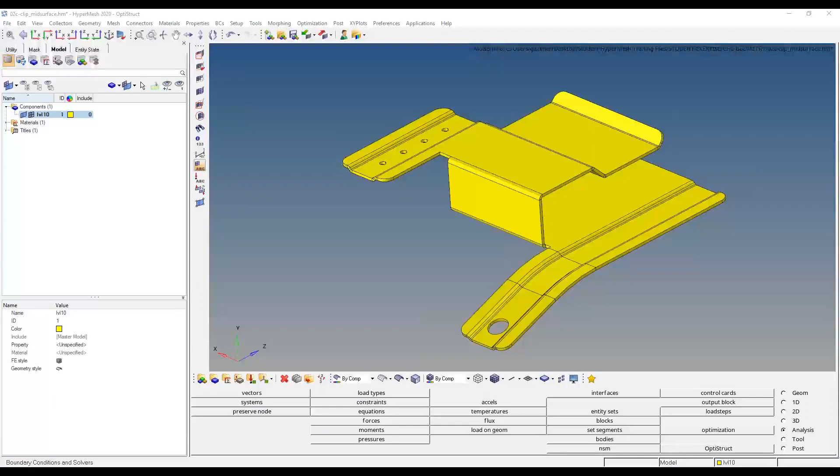One of the topics, you can go into much more detail than what I provided today, is a shortcut on why we can get away with modeling things in 2D, with a 2D element, even though they're meant to represent 3D shapes. We are going to learn in a moment that we can do this in the property part, but I want to talk about some of the geometry tools that can help us with this.

So we saw earlier, if I come into my geometry menu here, I can go to this middle column that tends to be organized. This middle column is for surfaces, whether creating new surfaces or editing existing ones. There we have this option called mid-surface. This tool allows me to select any 3D solid or enclosed volume of surfaces, and like we saw, pull out that middle plane. Let me set my view here for a quick moment.

I'm going to set some transparencies as well. A little too much transparency, it's not the easiest to see here. I'll try to get it a little bit of an offset. Hiding in that outer surface, which I'll make a very dark orange, and the inside a very bright white, is just an infinitely flat plane.

If I turn off the outer component, what's left here is just a flat plane. This was once a 3D bracket, but if we zoom in, it has no thickness. It's just an infinitely flat surface.

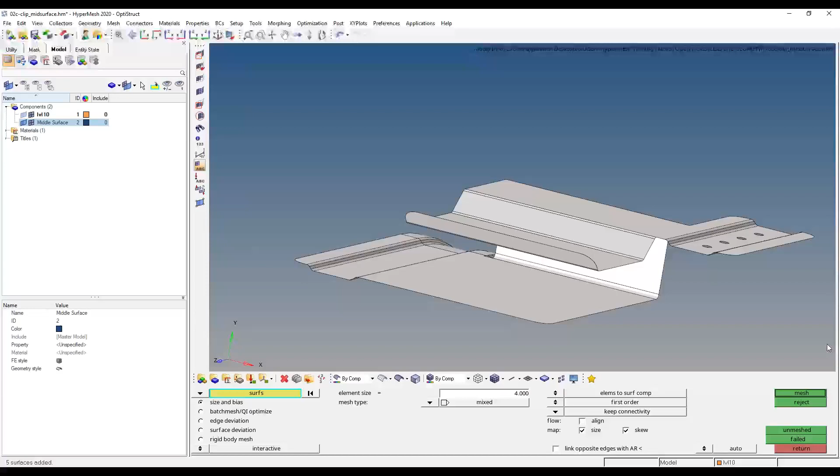That's okay, the meshing tools are still going to behave the same, and we're going to see in a moment how the meshing tools allow me to take a surface like this. Let me change the color so we can see me selecting it. As I'm selecting surfaces, it's still going to create elements for it. We're going to talk about a lot more in depth with meshing techniques and how to choose an element size tomorrow. For now, we're just going to get familiar with the basics of this tool.

If I just throw on a generic mesh here, so I just went with a 4mm mesh, it's going to give me 2D elements. When I'm done with it and I only display my elements, well, I still have that same problem. It's only an infinitely thin part, almost no thicker than tissue, a piece of paper. How can this possibly model a 3D object that's stiff, that can dent, and provide me stiffness?

We do this through the idea of a property card. Our goal oftentimes in FEA is to be able to do simulations that would be otherwise too expensive. Crash analysis is a really easy way for me to think of that.

It's expensive to get the sheet metal and the labor costs and everything else to design, say, half a vehicle just to put it on a sled, get it going 90 miles an hour, and run it into a barrier. That's thousands of dollars. If you can do a computer simulation that's just going to cost you a couple hundred dollars in labor and the share of the license, that's certainly a big money win there.

In FEA, we want to be able to do those as cheap as possible. That's why we want to go over this idea of this shortcut here. This shell property is what allows us to make what we might refer to as the digital twin.

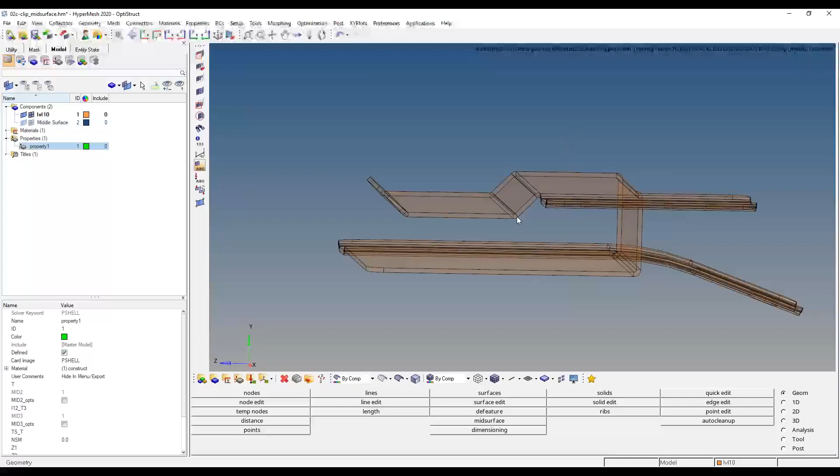But if I come in here and model this part with the appropriate thickness property, we're going to see together that HyperMesh does have some basic geometry tools here. One quality of life tool I can call out: if I come into my spotlight tool, we have a little tool hiding in my geometry menu called Length, in that second column to the left.

This allows me to pull out the length of any given line on my part. I'm going to use this to extract this particular geometry line here, which defines the part thickness. It lets me know that's about 9/10 of a millimeter, 0.91 millimeters thick, probably in millimeters if I had to guess. We'll just call it 0.91 millimeters here.

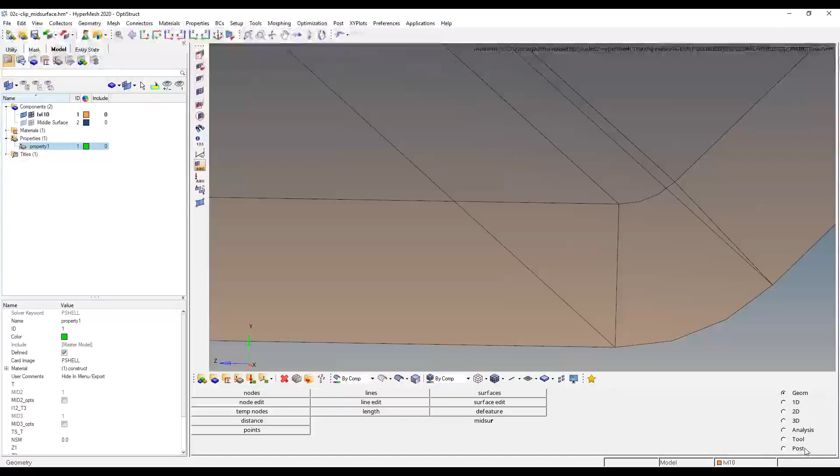So I'm going to need to create a thickness card that lets me know all those elements we created had a particular thickness. So I'm working on a property card.

We're going to learn all about the different other varieties of properties a little bit more tomorrow. I'm going to model this guy with a 0.91 thickness, and nothing really happened there. It feels a little underwhelming.

But one of the cool things we can do in HyperMesh is using those same representation tools or rendering tools we learned about on the underside of the graphics area. There's a little hidden option here for element representation.

So I want to talk about element representation now that we're familiar with surface representation. Like we saw before, there's tools in here to describe how we want to color our components. I just recolored this component to be yellow, but you can assign it to be the color of the material assigned to the part, the color of the property card assigned to it, or even things based on thickness or configuration. There's all sorts of different ways we can color these components. I'm going to go back to a color system of just by the component for a moment.

But likewise, we have things like transparent elements or wireframe elements, shading them back in without the mesh line. There's all sorts of ways you can render these. But I think more practical than any of those, hiding just a few more options over to the right, it looks like a gray flat sheet.

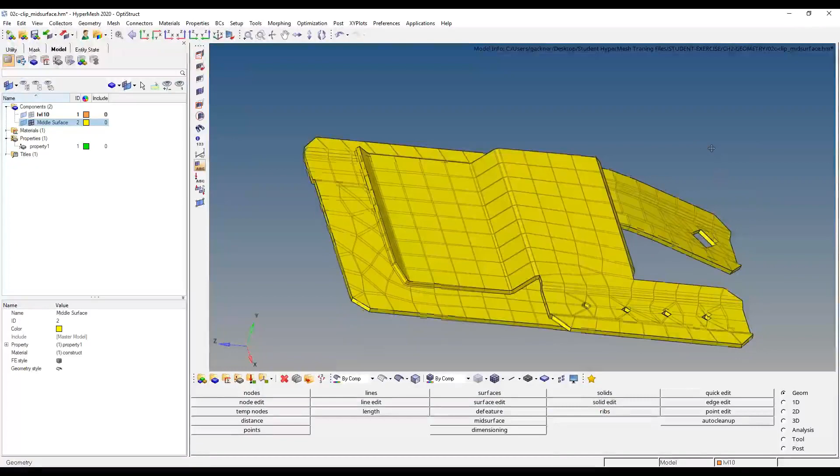What this is, is our 2D element representation. If you pull this dropdown open, I'm going to choose this option called detailed element representation. What this allows me to do is actually see how those aren't actually infinitely thin elements. They're meshed as infinitely thin, but by the time the solver sees them, once this model is exported and actually being solved for, the calculator is going to know to treat those as elements that are as thick as we're seeing them here in this detailed representation, and it will generate the stiffness for them after the fact.

So I mentioned before in our theory lesson that we're solving Hooke's law for each element. F equals kx, we invert it to be F over k equals x. X turns into a displacement and a stress result. And I mentioned that in this equation, F and K were user-defined parameters, K representing the stiffness of any given element. How is it deriving the stiffness of those elements?

It takes the shape or the area of the element and applies the material definition, which will have a Poisson's ratio, a Young's modulus, and all that jazz to it, as well as the property definition. In this case, the property definition has the thickness. So it takes an area multiplied by the property card, gives it a volume, applies a material to the volume, and all of a sudden you have a digital representation of an actual part.

That might seem a little confusing. I'm sure I lost some of you. I apologize in advance. This is going to make a lot more sense tomorrow when we see this in a little bit more detail. But the property card is what's turning a mesh on its own from being just a really fancy geometry file into a digital or virtual representation of your actual part.

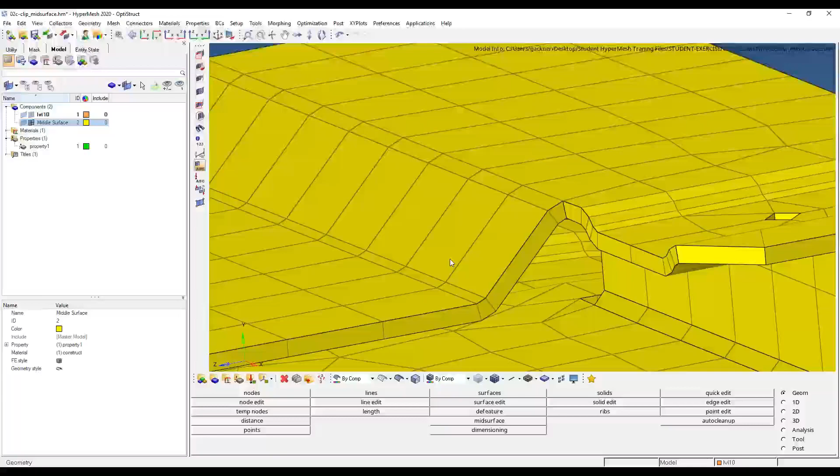And what's really great is not only do we have a tool, that mid-surfacing tool we saw, to quickly turn those thin plated solids into a mid-surface, but we also see that the mid-surface, once meshed, it was very quick to create the appropriate property with a single thickness value and then turn those flat elements into not just paper thin, but actually having volume and stiffness.

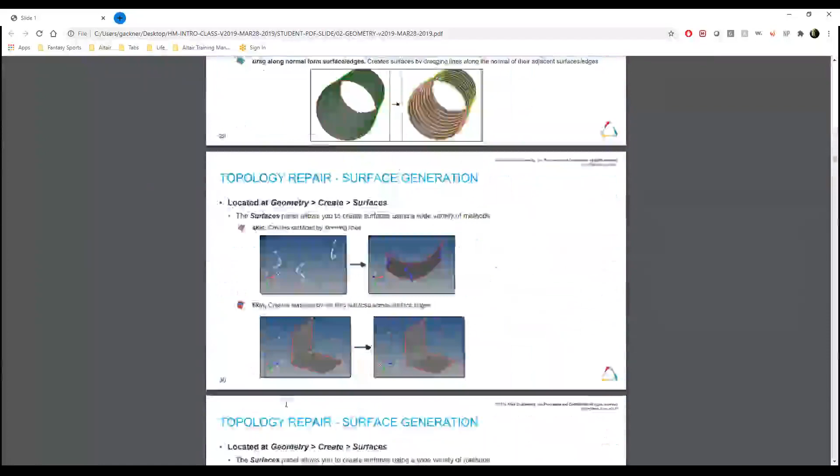So when you're going through the geometry tools PDF I mentioned earlier, this was a behemoth of slides in here. There's certainly worthwhile things on working in different unit systems and importing those unit systems in. We're going to put the topology lessons on the back burner. I'll talk a little bit more about that tomorrow as we get deeper into meshing. But the other couple things I'd want to mention is that there's a lot of surface and solid editing slides in here.

Definitely you need to review those one at a time, but mid-surfacing is as common as, it feels like, the PB&J of finite element analysis. There are certainly applications where you'll never have to mid-surface, or it won't make sense to, or you can't mid-surface, but it's an extremely common way of working with 2D elements.

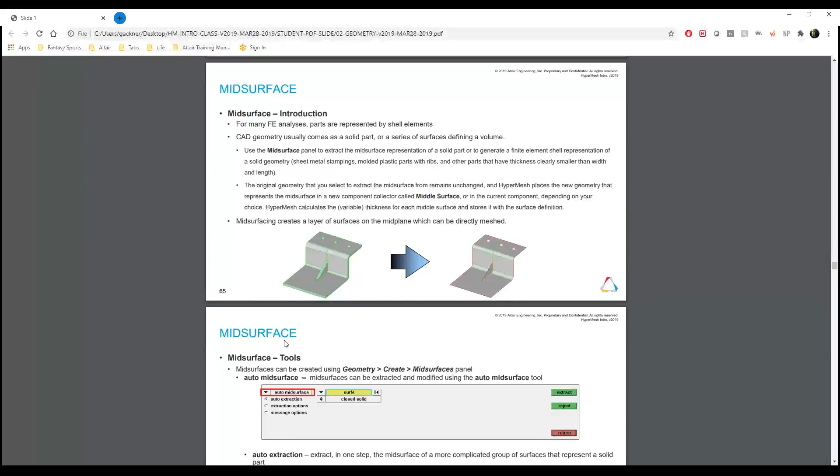Given the name, the mid-surface will always lie upon the middle part of the thickness direction of any given solid. Since it's at that halfway point, the thickness applied to the elements through the property card doesn't apply all of the thickness on top or bottom. It applies half the thickness on top and half on bottom to account for that.

So it's a very flexible workflow for you. And we're going to remember why we took the time to talk about this idea of a mid-surface: it saves us time. Well, let me be more careful—it doesn't save us time, it probably took us 5 minutes to make it. It saves your computer a lot of time.

One thing you're going to hear me say more and more throughout our sessions is: if it costs you an extra 5 minutes to save your computer 2 hours, pardon my language, but damn right you're going to take those 5 minutes to save the computer 2 hours.

I'm a big fan of what I refer to as deliberate modeling, and that can be painstakingly deliberate or redundant sometimes in my mind. I know some of our newer guys have given me a hard time for trying to get them to go very diligently through some workflows when I'm training them up. But in my mind, we really want to avoid an FEA being 1 step forward, 2 steps back when we're getting into advanced meshing tips tomorrow. We always want to be 1 step forward, then the next step forward.

We're always going to be looking not just to be deliberate that way, but anytime we can spend an extra 5 minutes to save 2 hours down the road, we're generally going to want those time savings. Back to those shortcuts: by cutting 3-dimensional things up into slices rather than cubes and just giving it an analytical thickness, that's going to save you a lot of time in solving steps. So when you're waiting for your results, this is a very quick way to ensure a much smaller wait by taking the time up front to generate a mid-surface.

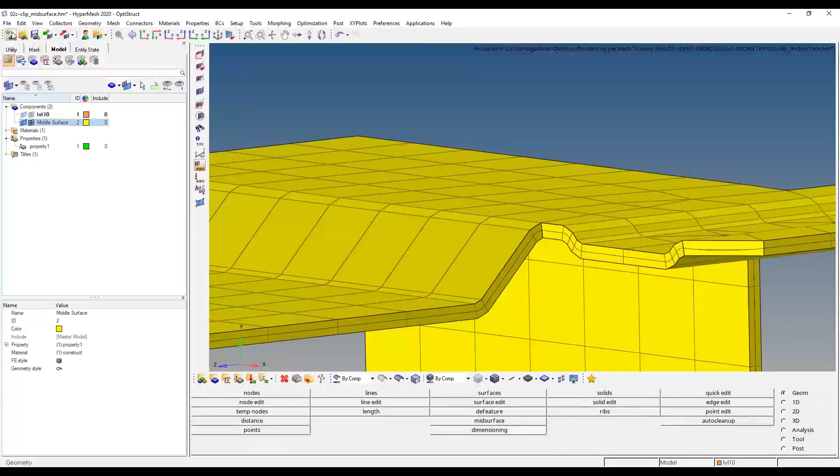So what I'm going to do is close this model, and I'm going to open up, in our chapter, there'll be chapter 3, 2D meshing. I'm going to open up 03A. It's a sample surface mesh.

Now, if we were in a live training here, I would have a little competition with you guys. I'm always curious what people think this part is. I've never been confirmed from our content team on the folks that made this training module. I think it's a heat shield. If you have a better guess, I would love to hear it. I've heard some people also call it the Batmobile. So if you want to think of this as the Batmobile, where you kind of squint and it sort of looks like the Batmobile, I'm not going to stop you. Whatever gets you excited to mesh the part though.

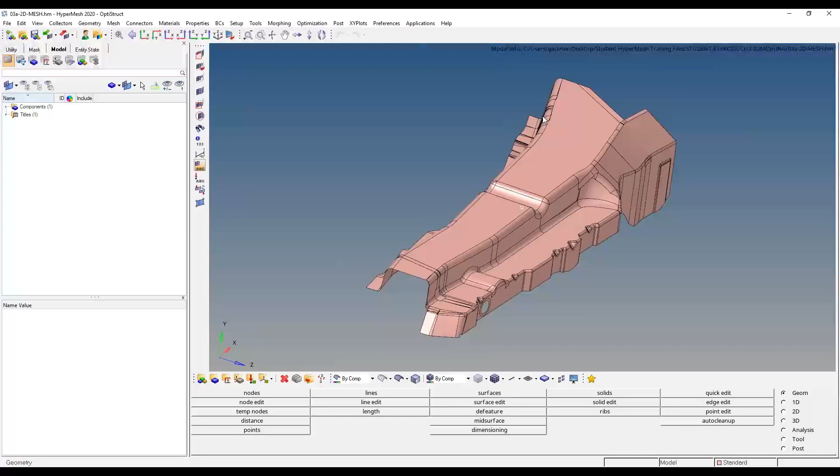But we're going to notice right away, whether we think it's a heat shield, the Batmobile, or something else, this is a thin solid—excuse me, not a thin solid. It is a mid-surface.

This has already been mid-surface for me, or at least it doesn't have a 3D component to it. This is only a 2-dimensional entity. So as a rule of thumb, when you're working with surface data, not solid geometry, you almost always have to assume you're going to be applying that thickness property after the fact.

Now, I want to go about meshing this component though, and we're going to talk a little bit more about the whys and the thought processing and meshing smarter, not harder kind of platitude stuff tomorrow. Today, I just want to make sure that when we leave today, we at least know the operation order in order to make sure we're generating elements.

So what I'm going to be concerned with here is in my panel area, I'm going to come down here and I'm going to set this to my 2D page. And from my 2D page, there is a boatload of tools. And hiding in the second column to the right, at the very top of it, is a greatly appreciated tool known as the Auto Mesh tool.

For you keyboard warriors, put this in the chat window: the F12 key is the shortcut key to launch the Auto Mesh tool. So if you don't like having to take your mouse hand, bring it all the way down, switch to the 2D menu, bring it over left to Auto Mesh, if it's faster for you to just hit F12, that'll always get you to the same place as the button clicks. Whichever your preference is, I don't want to force people into mouse controls versus keyboard controls. Just want to make sure we're aware of the options available to us.

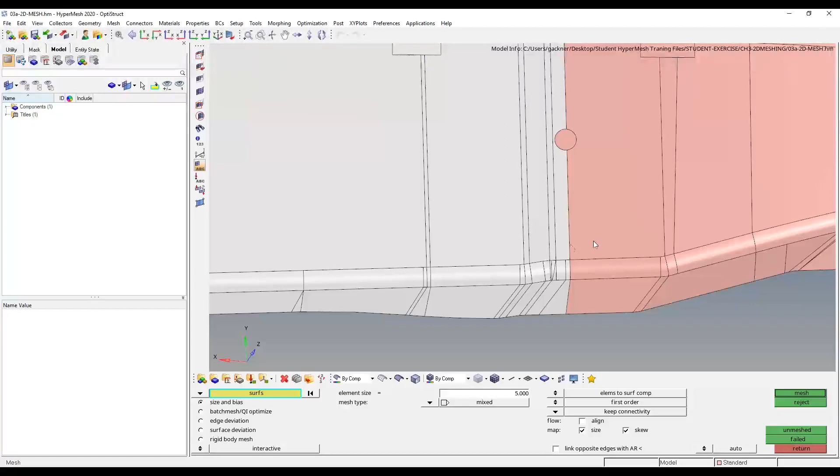You don't want me on your team. Now, I said earlier though, if you click a lot, you're probably not leveraging a shortcut. And I can already hear someone screaming at me saying, do the window selection. So certainly I could come in here, hold shift. While I'm holding shift, I can select more stuff, or I can even leverage a shortcut from the yellow panel menu when I click the yellow panel. And all of these other shortcuts popped up here. I have options such as select surfaces that are all displayed, just select all of the surfaces, select everything on a particular plane, select things by the component that it belongs to. There's a variety of selection shortcuts you can experiment with.

What I'm going to do for now is a very common one I do. I'll click the yellow panel, I'll come over to the left column, and I'll just hit all. What this is going to have me do is just select everything in my model, whether it's displayed or not. And now that I have all that selected, I can actually use the meshing tool itself.

The meshing tool, once you supply it surfaces you want to create the elements on, the only other input it needs from you is to know how big those elements need to be and which type of elements they should be. So we're already introducing a couple of questions that we want to ask ourselves. I'm going to keep it simple for now, just use an element size of 5 millimeters for this model. And for mesh type, you're going to see there's a little drop-down menu just next to it, that little arrow pointing down. I can open this up, and there's a variety of different elements or shapes I can use.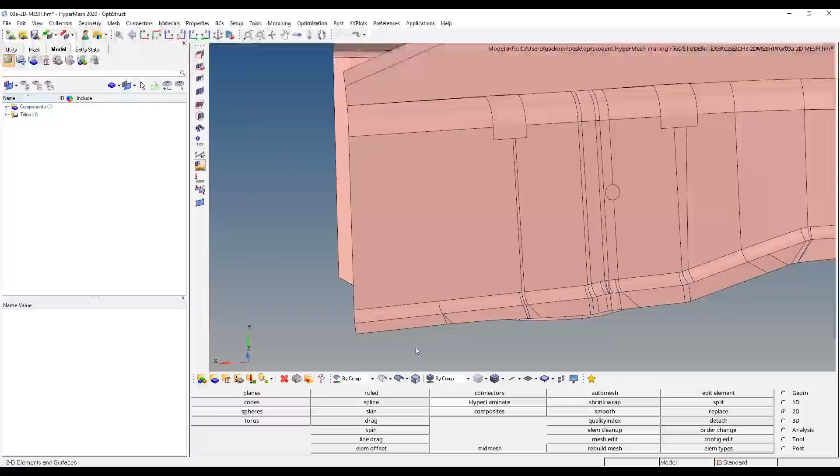I'm going to go back to my mesh tool, and I'm just going to mesh one surface this time. We're going to start simple. I'm going to mesh just this little surface fillet over here. I meshed it, I hit OK, and now what I'm seeing is the green mesh before it's finalized.

And I see a couple numbers on the screen. I know it's probably tough for you guys, it doesn't let me change it as I zoom in. The numbers being shown on my screen here, I'll pull up the PDF slide to help me out, call these out for me, is what we refer to as the element edge density, or the node density on an edge. Element and node density are typically used intertwined, though technically node density would always be one higher than your element density. And this is what I'm referring to here.

They got a nice example of it on slide 6. So what the heck is all that 5 referring to? That 5 is referring to the number of elements that are going to be placed along that edge.

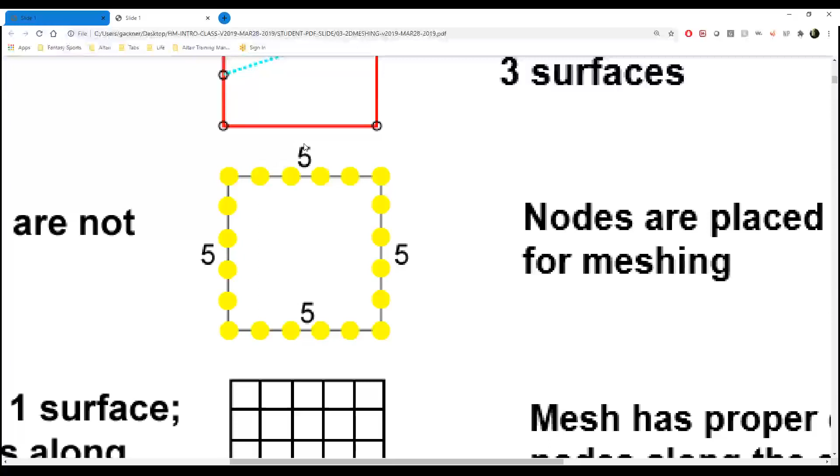So in HyperMesh, the meshing tool actually isn't that fancy. It does some cool things behind the scenes, but the basic logic of it's really straightforward. It takes every given edge length on the surface that you've meshed. So I got 4 edges for this simple fillet here, top, bottom, left, and right. It takes however long that edge is and just divides it out by your average element size.

So let's say you had a 30 millimeter edge that you wanted to mesh with 10 millimeter elements. Well, it can figure out very quickly that 30 over 10 is 3. It can fit 3 elements comfortably along that edge, and that's what it's showing me here. So HyperMesh has figured out that if I want to do an average of 4 millimeter elements or so, it could comfortably fit about 7 on the top edge.

Due to the radial difference on this edge, which has a smaller inner radius and an outer radius, it wants to do 6 elements on the inside, and it's going to do 4 elements in that radial direction on the left and right there.

So right away, it's just taking your edge length, dividing it by the element size, and figuring out roughly how many elements it could fit for that given size. Once it has that outer perimeter mapped out, it's just going to use the element types you provided and find the most optimal way to arrange the shapes on the surface.

So where I'm going with that is just remember that meshing within HyperMesh is done exterior inward. It starts with those edges, and then once it locks in the edges, it just fills in the rest for you.

So you really shouldn't be too concerned while you're going through here, thinking 'oh man, I want to change that one individual element shape.' A better way to think of it is just in terms of these element densities, and I think that can really simplify the number of things you have to worry about.

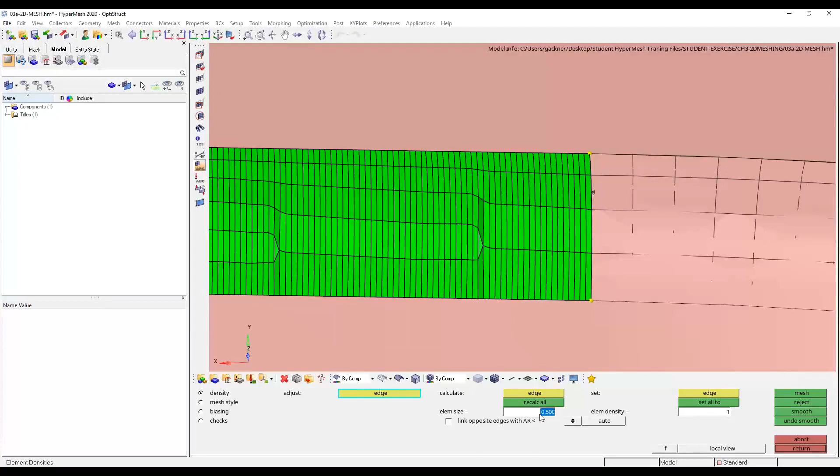So one thing we're going to learn about is that we want to be trying to do mesh uniformity, and as often as possible, we want every element in a perfect world to be the same size and same shape as its neighbor. That said, sometimes tria elements are necessary, but sometimes tria elements aren't necessary.

Which brings me back to this situation here. Because of changes in length at the inner and outer radius of this fillet, HyperMesh determined that it'd be best, from strictly an element size standpoint, to only do 6 elements on the bottom.

But I mentioned that meshing is interactive as well, so I can actually come in here and, using a left click before I lock this mesh in, left click the edge—that bottom edge that only has 6. As I left click it, it's going to increment that element count by 1. So that number went from 6 to 7.

Now that it's been updated, I'm going to hit that mesh button again in the tool. And we're going to see that it remeshed it, this time with 7 on top and 7 on bottom, and that gave me a much more uniform mesh.

So I like to think of meshing only in terms of those element densities, because A, it's starting with those when it meshes, but B, the easiest way for you to adjust the shape of a mesh on any given surface is to adjust those density values on the edges.

So knowing that's what we're going to be working with, what we're going to learn a lot about tomorrow, we're going to kind of dive right back into this problem here. I want to show us a kind of practical workflow on how we can mesh this part.

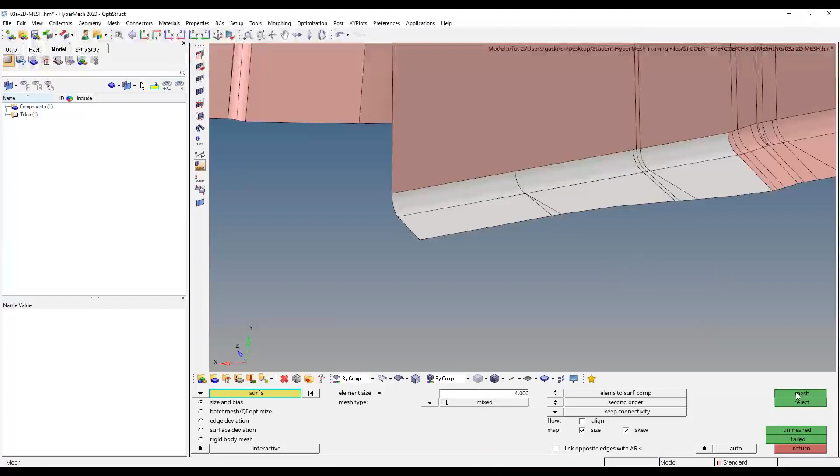I'm going to hit mesh, or alternatively, for those of you with a scroll wheel on your mouse, you can click in the scroll wheel as OK or confirm. And now I have all of these edge densities to adjust.

If I left click up here on this top edge, I can adjust it from 9 to 10 elements. Typically when you have identical numbers of your top and bottom edges to your left and right for boxy surfaces, HyperMesh will be good about maintaining a very orthogonal and quad dominant mesh there.

It's when those element densities don't line up with one another evenly that it introduces a tria element to account for the transition area. So anytime you're trying to go from 4 nodes to 3 nodes, the only way it can do that across that area is at some point one of those quad elements has to get shrunk down to a tria to manage that 4 to 3 transition.

The left click of this mesh tool allows me to increment and adjust those densities. Just like you can increment it up with a left click, you can right click it to increment it down, to say you want to use fewer elements on that particular edge or density there.

So this is allowing you to come in here and not just get clean mesh flow—there's a lot of other ways we can influence this. For me personally, when I'm looking at this tool, I'm trying to think of it as a way to give me as clean of a mesh as possible, so all of my elements are ideally as close to the same size as possible.

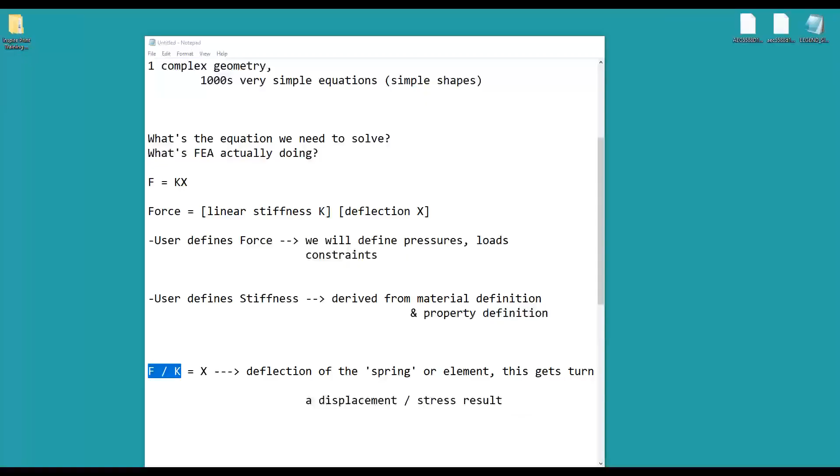Like I told you guys before, my biggest goal today was to make sure we knew: do I know where this UI is? Do I know some of the basics of the geometries we're going to work with? More than that, do I have enough of the theory background in the back of my head, or know the right questions to ask, so that when we get into questions we'll have to answer with meshing tomorrow—things like what's the ideal mesh size I should use, or when do I not want to use a mixed mesh but a different mesh type—we can pull on some of the lessons we learned in this theory lesson to help out.

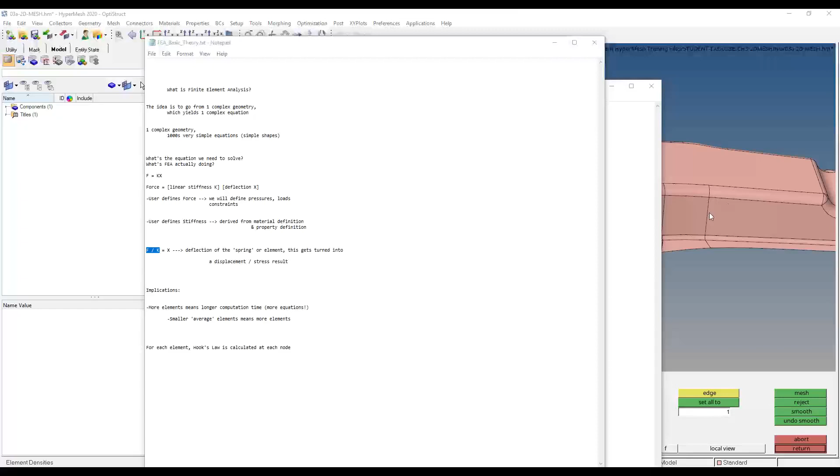Yeah, let me pull up my Pictionary slide here. So what's happening there—I think it's clear why we would ever want to model something as 3D using a 2D element. It comes directly from an 8-cornered element versus a 4-cornered element. The 4-cornered element is quicker to solve for, and essentially has 4 equations tied to it instead of 8, as a very rough way of thinking about it.

But how it actually goes about still accurately representing this has to do with how HyperMesh derives stiffness on any element, whether it's a 3D element, a 2D element, or—we'll learn briefly tomorrow—a 1D element, which is a straight line with an analytical cross-section rather than a sheet with an analytical thickness. Let me come back into my model for a moment and close this out, and pull up a 3D model to compare it to.

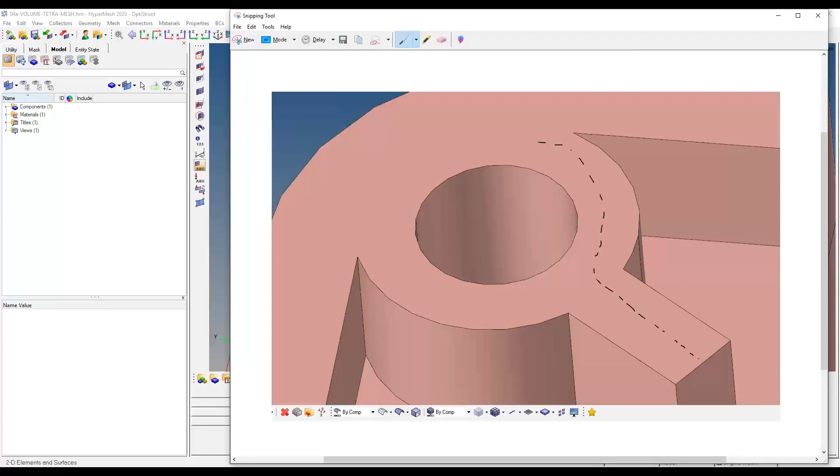This is a part we're actually going to see tomorrow. This part would be extremely challenging to model with a 2D approximation because there's no obvious way to generate a mid-surface for it. Sure, if I zoom into this little feature here, I could take a pen and define that middle section, outline it, and say this flat sheet—the black checkered line—should be some 5 inches thick, or whatever the part dimensions are. But that's only in one offset direction.

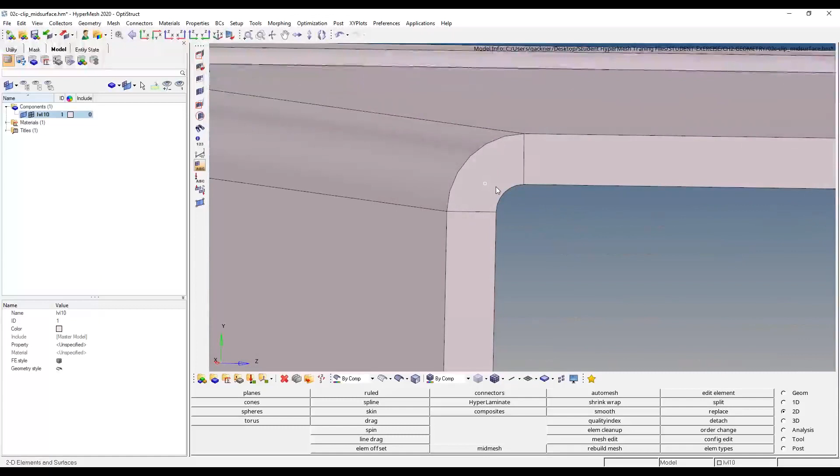This part is so awkwardly shaped, it's got thickness in every which way. It's not always going to apply that same offset thickness direction consistently. Whereas if I come back to the clip we were working on earlier—this component, yes, it's a 3D one, just like the previous, more blocky housing structure. But what's convenient about this particular 3D structure is that it's always uniformly thick in the same offset direction. It's not suddenly getting thicker on one face than the others. This thing clearly has a constant, uniform thickness—or it doesn't even have to be uniform, as long as it has a constant mid-surface. So the geometry of the part allows me to get away with that mid-surface shortcut.

One thing I hadn't explicitly said is that not every 3D geometry is going to be eligible for a mid-surface approximation, or shortcut. We're going to learn tomorrow with 3D meshing that there are a couple different ways to 3D mesh a part with 3D elements. One school of thought uses only tetrahedral elements that turn into pyramids. Another starts with basic 2D squares and triangles and pushes them into a third dimension. We'll learn tomorrow that not every part is available for that second approach of extruding 2D elements into the third dimension—there are a couple caveats that come with that.

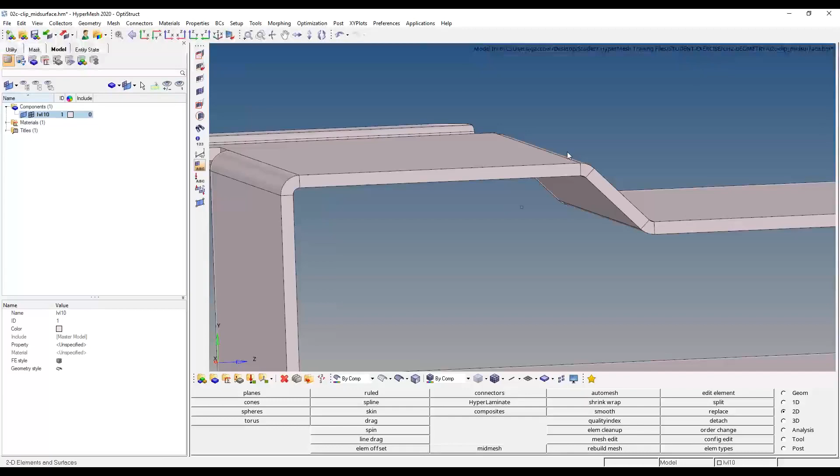So hopefully it's a little more clear why we could do a mid-surface on this component: it is always that 0.91 inches thick, regardless of the part.

Whereas if I went back to that other solid - coming back here, wrong folder - this particular solid sometimes gets thicker in one direction and not in others. With this arch structure too, you couldn't really figure out an easy way to get a mid-surface for it, because it'd have to apply thickness in multiple directions.

That gets really challenging. Now, how it's actually generating the stiffness correctly for that given volume has to do with how HyperMesh derives that stiffness. So really, what's going on behind the scenes - let me list this out a little more clearly here.

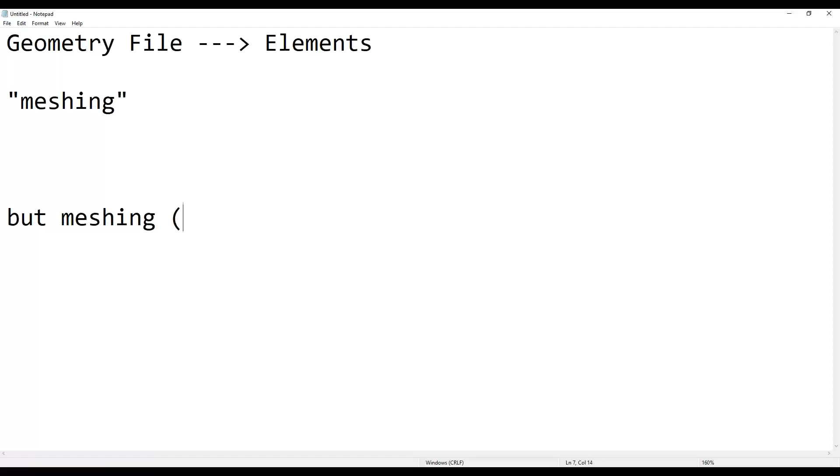We take a geometry file and turn this into elements, and we call that meshing. But meshing on its own is just fancy geometry. It doesn't have stiffness, doesn't have mass. We don't know anything else about it. A mesh on its own is no more telling than the original CAD file you worked with.

So if the mesh is meaningless in this sense, how does my solver actually solve the math problem? How do I solve my cantilever beam problem if my mesh of the cantilever beam is meaningless? It isn't the mesh that gives it physical meaning - it's a combination of two entities, materials and properties, that provide a given mesh body a physical definition.

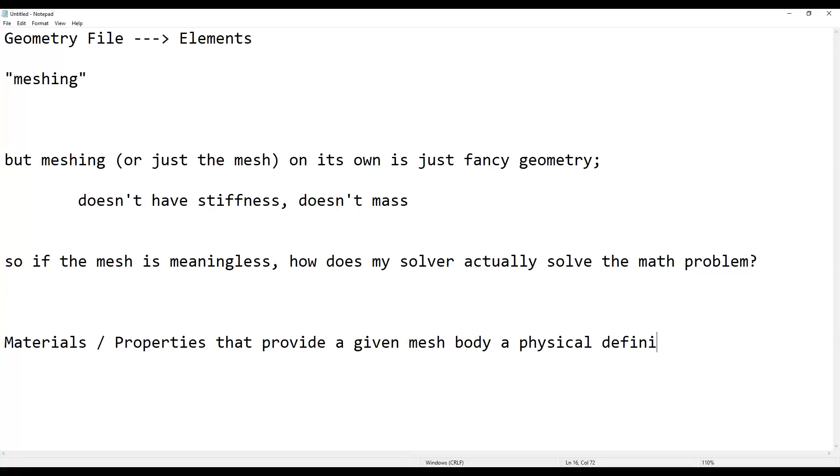So what happens is, in this order: HyperMesh identifies an area of your 2D element and multiplies it by the thickness property to create a volume. It knows some area, and if it applies its thickness on top and bottom of that sheet, it turns a flat piece of paper into a box.

That's the volume. And now that it knows how big that volume is, it's going to take the material definition, which is going to have things like your Young's modulus for stiffness, your Poisson's ratio to describe how it can deform, and even the density to describe how heavy that material is. And it will apply that volume, known as the element now, to this material to give it that stiffness value.

So it first takes the element and applies the property to it. If it wasn't already a volume, it's been turned into a volume because of the property. And then once it knows the volume size, it simply takes the material definition and applies it to that element.

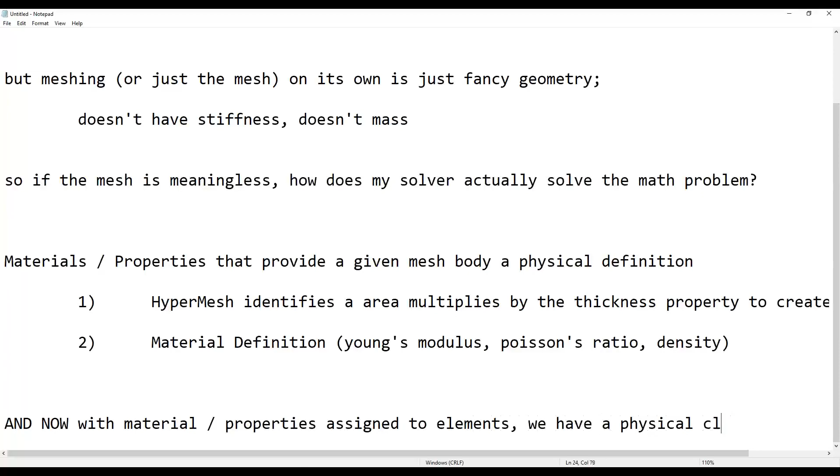And now, with materials and properties assigned to elements, we have a physical clone or a physical representation of a part - not just a fancy drawing. That's really the idea behind those materials and properties.

We're going to learn tomorrow how we can apply those, once we're done getting familiar with some of the other meshing tools. So really, our next class is going to be very element-driven - both in generating elements, reviewing them, knowing when to clean them up and how to clean them up, and also, now that we have these meshes generated, how do I actually make it a representation of my part?

Because going back to what we said earlier, we want to make sure we have apples-to-apples representations. It doesn't do us any good to spend all this time and take this HyperMesh training if we're not representing the same parts as we're going to design or manufacture with our different design teams. So hopefully that helped clear up where the stiffness was coming from with those 2D elements and why that's the case.

Thank you, Garrett. And if that doesn't fully clear it up, the ebook covers it also, so that might be of help too.